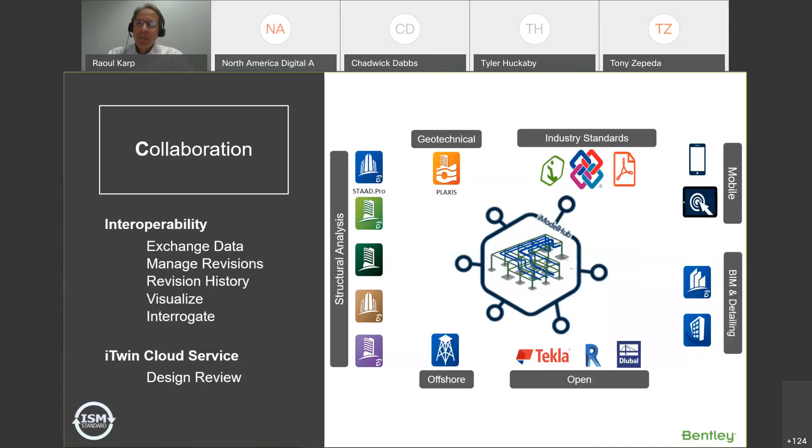I think whether you're a structural engineer working with an architect on a project, or a structural engineer working with, say, a pipe stress engineer on a project, as we see in this case, the iTwin Design Review Cloud Service is going to allow you to instantly share your design model with any other stakeholders in the project and conduct a real-time discussion through the web.

So from STAAD, you will soon be able to, for example, initiate a sharing session here, combine the structural model with other disciplines like piping, and have a conversation in the cloud with the pipe stress engineer, the owner, or even other structural design partners. In this case, we're going to try and resolve a clash or have a discussion about an issue with a clash on piping and structure, for example.

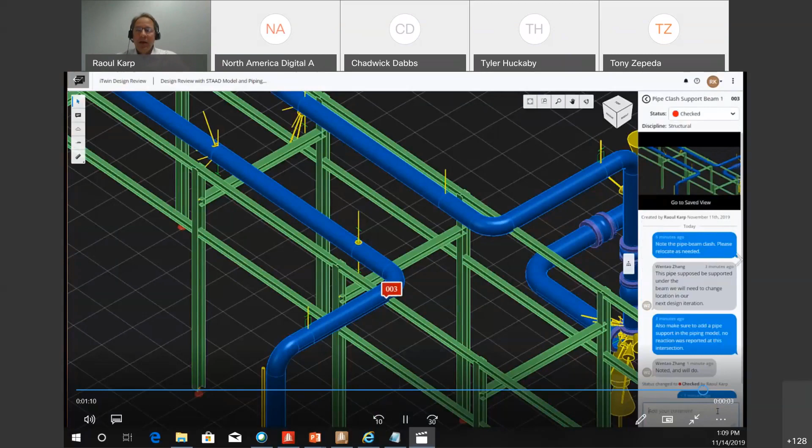The great thing about this technology is any stakeholder can access this with really just an email invitation. And the even better part of this technology is that they don't need to have any underlying skill set in the publishing product. So no STAAD knowledge is needed in order to utilize this capability. Great way to have an instant conversation in the context of your project, and that can be documented, tracked, and managed as action items through the rest of your project development.

I think another always hot topic for us is automation. Although when we talk to our users, they don't generally use that word. I think we hear more about how they want to be able to enter data once. You want to be able to share it between your products. And most importantly, you want to be able to automate as much as possible, I think, the repetitive workflow needs that you have.

For years, probably the biggest improvements in automation have been in the area of design code implementation and automation, and document automation. And really, we've made another major step forward in the STAAD Connect edition that you're going to hear about a little bit later.

But more and more, I'm also hearing that our users want to be able to do things beyond what the product can do. They want to be able to extract results, or even automate a workflow of their own, giving them perhaps a competitive advantage in a certain field. But to do either of these things requires a programming interface, and that's another area that we have invested heavily and continue to invest in. And this opens up some very interesting possibilities for you as our users.

So by exposing these interfaces, your company can, for example, now string together different products in an iterative workflow. We know, for example, that foundation displacement is a function of the soil stiffness. It's also a function of the foundation geometry and the reactions on that soil. And the reactions are, again, a function of the soil stiffness. So it's a highly interdependent design process using different products across different engineering domains.

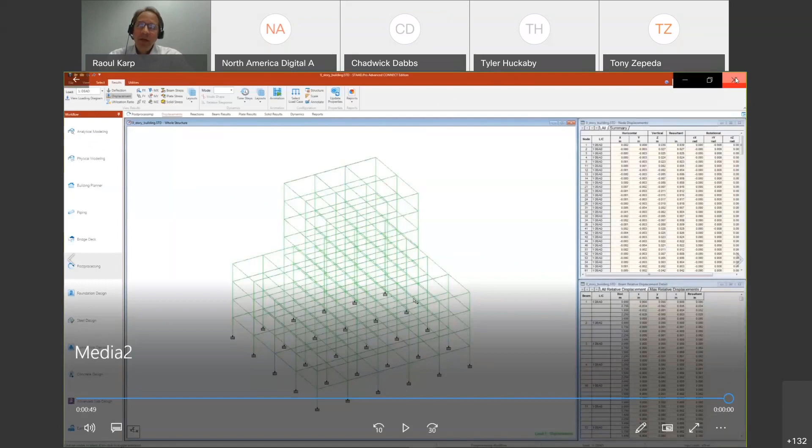So what if you were able to automatically iterate between, say, the structural analysis and the geotech analysis to produce a more accurate, efficient, combined analysis here together? So now, using the programmer's interface between these two products, we can couple and show an example here of using those programming interfaces to couple PLAXIS, our new geotech acquisition, with STAAD to automate that process. And you can use it for any of the workflows that you would like to within your organization.

So knowledge, technology, engineering requirements, they continue to grow, they continue to change. I frankly don't know how you stay on top of the industry and what you need to know, and even have confidence in the source of the information that you're relying on. We know YouTube is one of the largest search engines in the world, great source of information.

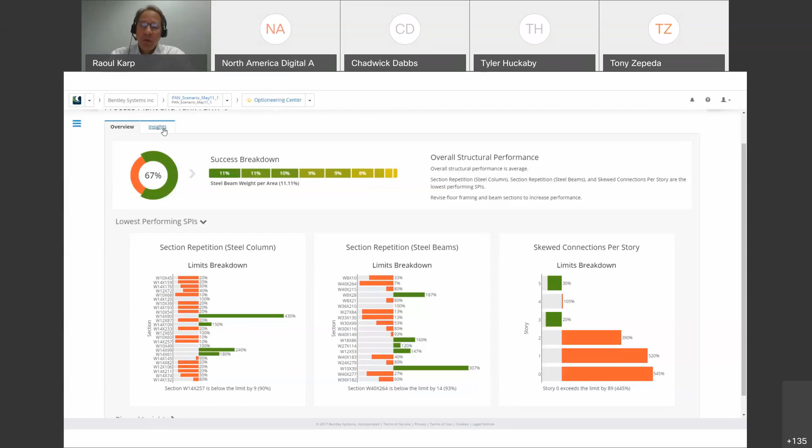With this new service, the cloud validation service, you're going to be able to do all of that. You're going to be able to establish a list of rules of your own, as we see here. You can then automate validation of these custom rules against the model. So the interactive web visualization you see here gives you clear feedback where you have met or failed or exceeded your internal QA criteria. This is a really powerful, easy to use and effective way to automate a large part of your quality assurance, even if it just highlights and identifies areas where you need to focus on for closer review.

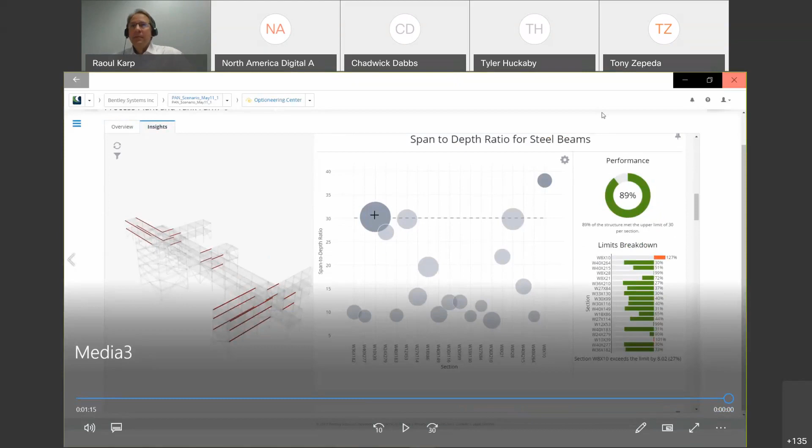So I mentioned at the start, STAAD Connect Edition. It's in large part a response to all of these areas and your feedback, areas that we could do better. I think you will see how, for example, the physical model approach allows much improved interoperability, including now with surface members, faster analysis for bigger projects, and concrete design and drawing automation has been taken really to a whole new level with this Connect Edition. And coming soon, the integration with the iTwin services I just showed you is going to be able to deliver many of the digital twin design review and validation capabilities that I just shared. This really is our most significant release in ages.

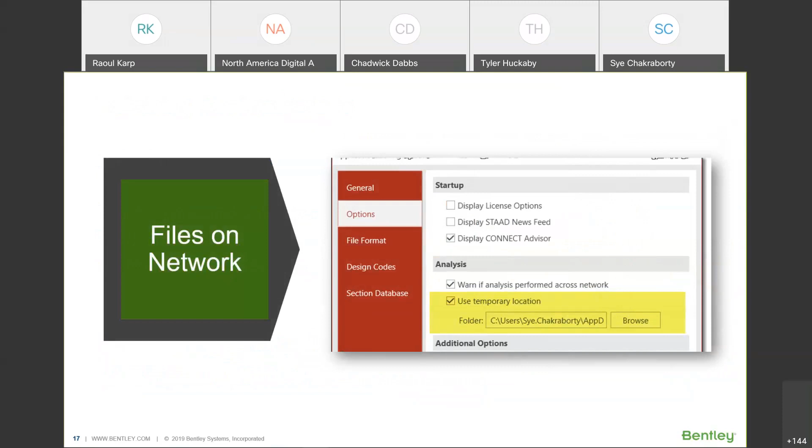I was talking about some improvements that we made for working with files on a network. So let me quickly show you. In a model, now what you can do is, if I just close the model for a second and go to the configure option from the startup page, you can go to options, and now you can set a temporary location in your local drive where STAAD.Pro can copy your model during the analysis. So this is certainly going to help with the performance of the software and will give you a faster analysis.

But having said that, I would still recommend that if possible, just keep the model on your local drive when you're working with STAAD.Pro. And once you are done, then you back it up on your network server. But if that's not possible for you, then the next best option would be to use this option. So designate a temporary folder in your local machine so that the model can be copied during the analysis.

Okay, so going back to our next slide, we actually introduced a new system of taking backups, and now you can actually create restore points. So say, for example, you are making major changes to your model and you would like to keep copies of those. Earlier, you had to just save the STAAD model by different names.

So there used to be multiple STAAD.Pro files for the same project, but you don't need to do that anymore. You can just create restore points and add adequate descriptions to these restore point backups. To do that, let me just open that same file, and you go to File, and then here is the Backup and Restore option.

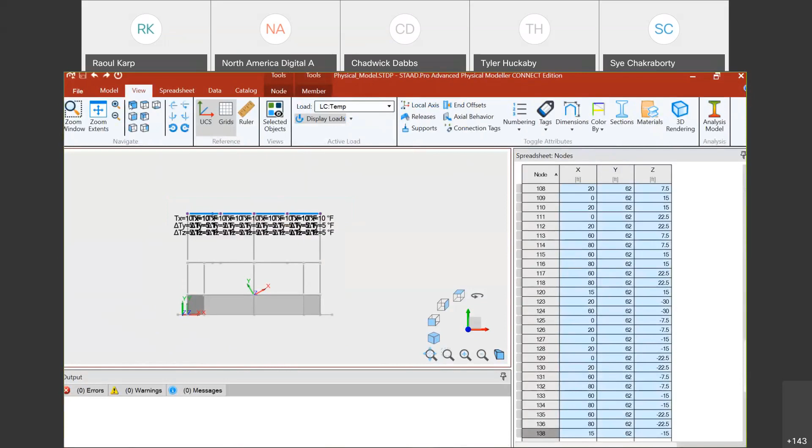And if I just go here, I have already defined a couple of loads for you. If I select a temperature load, let me view the model from the front and select these beams at the top. So you will see that I have applied temperature load to all of these members. Whenever a member is selected, if you go to the member ribbon menu option, it will give you the options which are relevant for the members.

And then you will see the temperature load in here, where you can specify the delta T basically for axial elongation or for difference in temperature between the top and the bottom of the beam or between the sides of the beam.

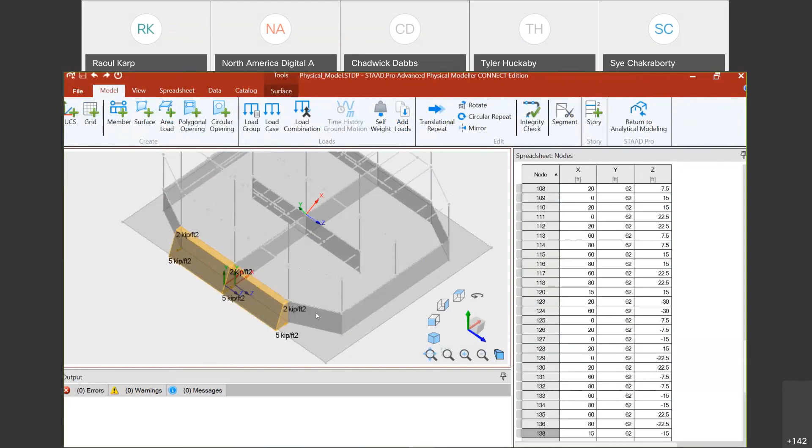Similarly, there are a number of options that have been added for the surfaces. So if I just select a surface, if I go here, you will see an option to add a variable pressure. So at various points on the surface, you can specify a value of pressure. That is possible. If you want to see how it looks, I have created a variable pressure load in here. So you see that there is a trapezoidal pressure distribution that I have created using this feature.

Similarly, you can add a hydrostatic load. So there's a trapezoidal hydrostatic load that has been added to the inside of the wall. And for hydrostatic load, all you have to do is basically just select a surface, go here, and just use this option, hydrostatic. And then you'd be able to define the density of the fluid that is retained and the level at which the pressure is zero. So basically, that's how you specify the hydrostatic load.

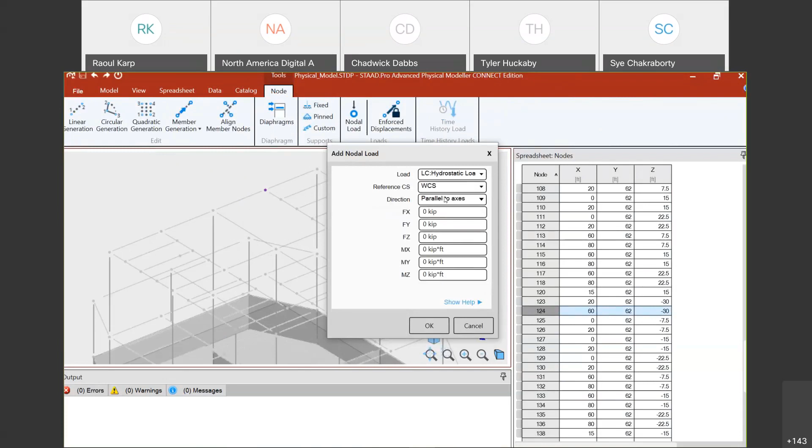And then let's say, for example, you want to define some inclined loads at the various nodes. So all you need to do is just select the node. And then if you go here, node, there's an option called nodal load. And that would allow you to define an inclined load parallel to any axis. So basically, you define a local axis, which can be at any inclination to the global axis, and then your loads can be defined with respect to that.

So if I just choose that inclined nodal load option, you will see that a number of loads in inclined directions have been applied. And this is with respect to this local axis. As you can see, it's inclined to the global axis system. And if you are trying to define repeat loads, all you have to do is go to File, Options, and then within the analysis model, you're going to see the option to generate the repeat primary load cases. So these are new loading options that have been introduced in the physical modeler.

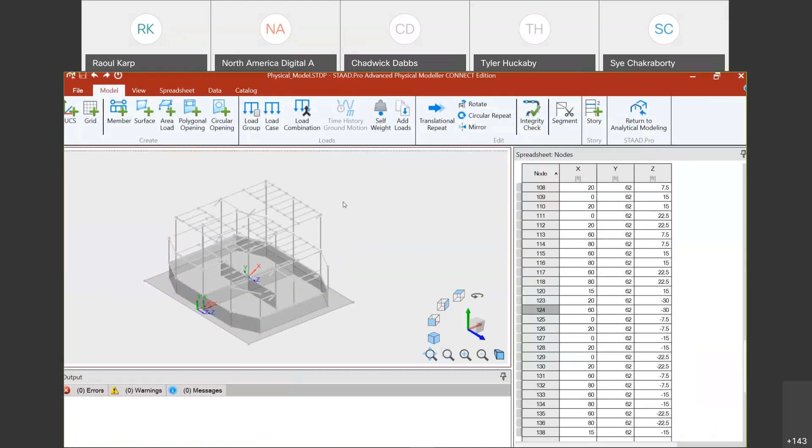Going back to the next slide, this is the new edit surface mode. So basically, you can select a surface and do some edits locally. So for example, if I just go back to my model, now before I make any edit to the surface, let me show you how the physical model is converted to the analytical model. So for that, you would have to just choose Return to Analytical Modeling option on the right-hand side. So at this point of time, the software is going to break up all your physical members or physical entities into analytical segments and get the model ready for the analysis. So once it's completed, you can click OK, and it's going to give you your finite element model.

As you can see, all of these entities are now meshed properly. There is proper connectivity maintained between the bottom slab and the walls, although we just defined the bottom slab and the walls as just one surface in the physical modeler. Similarly, these beams, which were just specified as single members, have been broken up into segments so that connectivity is established.

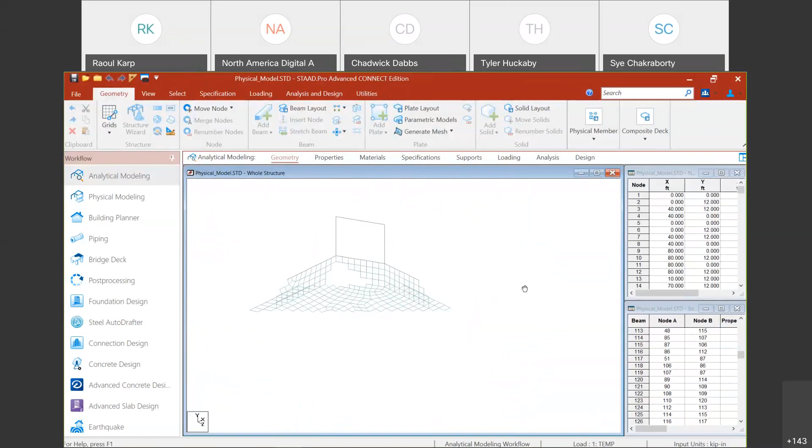So let's say I want to create an opening on one of these walls. I just wanted to show you how easy it is to use the physical modeler for these sort of purposes. So I'll go back to the physical model, and let's say I'll select this surface. And if I go to surface, there's an option called edit surface. So from this model, that particular surface is going to be isolated, and I'll be able to work locally on that particular surface. And let's say I want to add an opening to it.

So I'll go to circular opening, I'll specify the radius, and then click on OK. And there's a grid already that's created, and you can control the settings for the grid. And you just come in and select the center of that circle, and it creates the opening for you. And then it's not part of your main model as yet, but you can go back to the edit surface, and at that point of time, it will ask you, do you want to commit this change and make it a part of the model? If I choose yes, then it will basically create that opening in here.

And if I then go back to the analytical model, it's asking, do you want to save the change? I'm choosing yes. So basically, it's going to bring the change to the analytical model, and it would readjust the mesh. But if you want to do the same thing using the analytical modeler, you'd need to actually get rid of the mesh for that particular wall, and then recreate that wall with the opening.

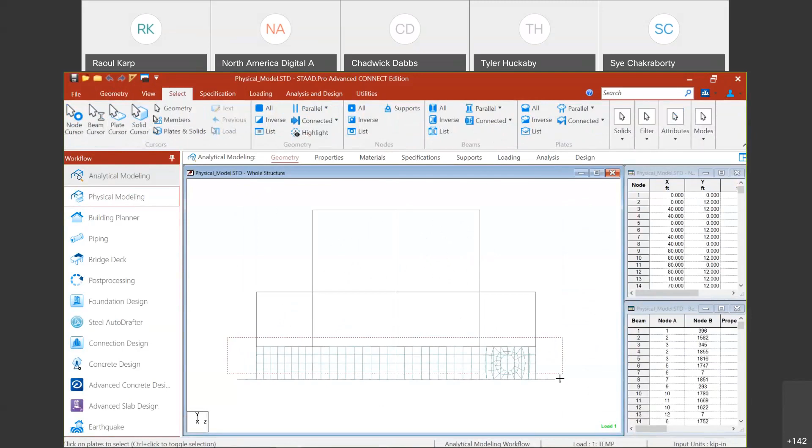So if I just view it from the front, and let's say I select the plates which are for the wall, and go back to this view. Now you can see how that opening has been created in that. So these are the kind of flexibilities that the physical modeler allows you.

And as I said, it's something that is under development. We are working on it, and so with every version, we are adding new capabilities. But if you are someone who enjoys modeling with physical entities, this is the right time to get your feet wet and start experimenting with it.

We added the IBC 2018 ASCE 7-16 code, so you'll be able to add this code. It will be available as a selection for you. And when I go into the steel design portion, I'll discuss this one too.

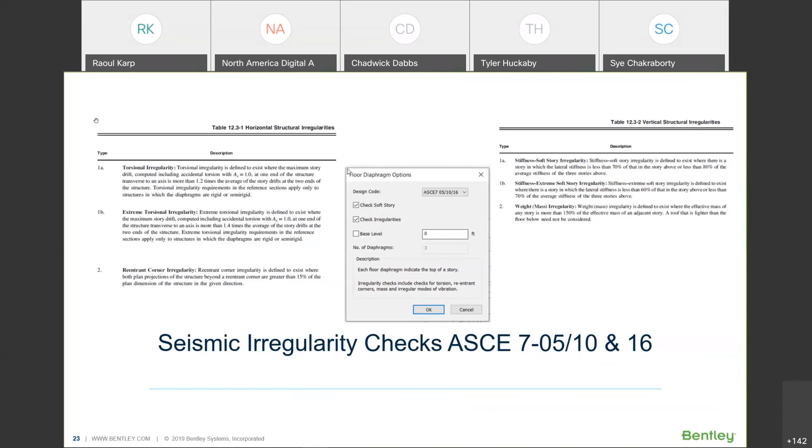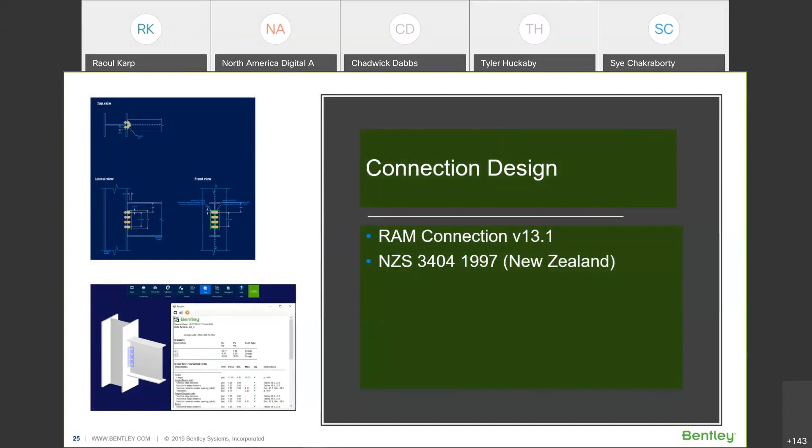We introduced the connection design using the RAM Connection version 13.1. I'll do a little presentation on that down the line. And the highlight of that one is the addition of the New Zealand code to the RAM Connection interface.

Viewing multiple sets of design results for the AISC 360-16 code, this is something which as a user, I'm pretty sure you'll be all excited about. Let me just show it to you. So I go back to the analytical model, go back to the steel model, and if you go to the post-processing, then here you will see the various parameters. So each of these represent a particular code check done with a certain set of input parameters. And now you'll be able to see all of these using the graphic user interface.

So if I turn off the displacement and turn on the utilization ratios, so this is for parameter 1. If I change to parameter 2, it will just update my view to parameter 2. And similarly, you can get those shown in your design tables as well.

We actually revamped the results along cut line feature. So now you're going to have stress continuities across element boundaries, and equilibrium of forces will also be maintained along the line. So the results that you are going to get using this feature now are going to be much better than what they used to be.

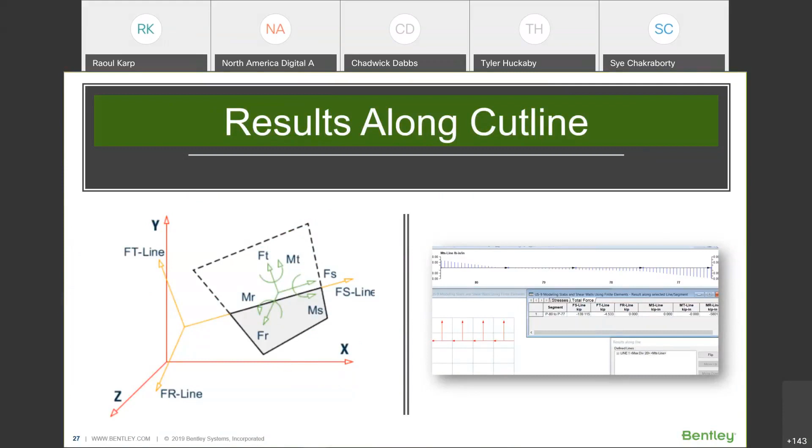The advanced concrete design, we have a detailed presentation on that later on, using which you'll be able to generate detailed drawings and bill of materials, etc., straight off your STAAD.Pro model.

We made significant changes to the analysis engine, so you are definitely going to experience a lot better performance from STAAD.Pro. Even if you are using a STAAD.Pro standard license, V8i versus Connect Edition, you would see a 1.5 times improvement in performance. So a standard license used in V8i, when compared to a standard STAAD.Pro license in the Connect Edition, the Connect Edition one is like 1.5 times faster.

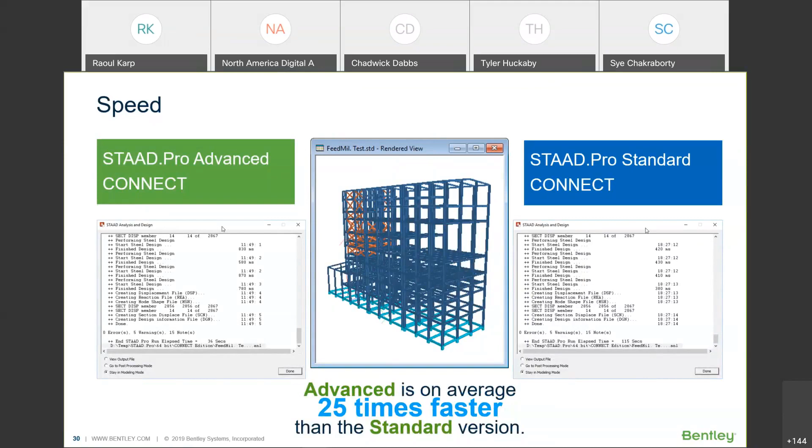Of course, it varies from model to model, but the difference is more significant when you have more complex models that take a long time to run. These are models where you are really going to see the performance improvements. And then again, even in the Connect Edition, if you are using the standard versus the advanced license, advanced is a lot faster.

And Raoul talked about the interoperability at the beginning of the presentation. I've also included this specifically to highlight a few of those. We have got direct integration with STAAD Foundation Advanced, using which you can do the foundation design straight off your STAAD.Pro model. I'm going to show you that. The RAM Connection integration, again, I'm going to show that to you, how you can quickly generate connections, connection calculations and drawings from your STAAD.Pro model.

Then we have the advanced concrete design, or the RCDC. That's going to allow you to generate drawings and bill of materials from within STAAD.Pro. And last but not least, the AutoPIPE integration. So you'll be able to bring in any piping loads into your structural model, and then send the combined piping and structural model back to AutoPIPE for further analysis.

And apart from the direct integration, we also have the ISM-enabled integration. So any package that is ISM-enabled would be able to communicate with STAAD.Pro, be it a Bentley software or a third-party software. So all of our RAM suite products, and then ProStructures, and all of the Bentley products which are ISM-enabled can now talk to STAAD.Pro. And also third-party products like Tekla or Revit, you can also get data from those packages.

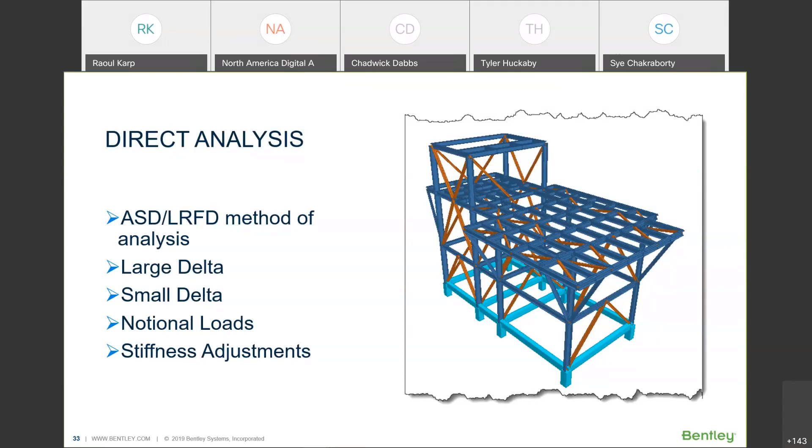Let me bring up the STAAD.Pro model back. And actually, let me just show you a 3D rendered view of the structure. I haven't really spoken about the structure as yet. So it's a typical industrial structure, as you can make out. It has got multiple levels and braces in the vertical as well as horizontal planes. And I've got a few projections on the sides. The platforms have little projections. These are supported by knee braces.

And at the bottom, I've included a few concrete members. So at the grade level, you see a few concrete beams supported on a few concrete columns. So we are actually going to do an analysis of this structure. I've specified all of these specifications that you'll be able to check out later when you get the model. All of the braces have been specified as trusses, and I've specified a number of releases at the various beams.

And then for the loading, what I have done is I've included the IBC 2018 seismic load generation. This is something that has been added in this version, IBC 2018 ASCE 7-16. All the parameters have been specified relevant to the code, and some seismic weight has been added as part of the seismic definition.

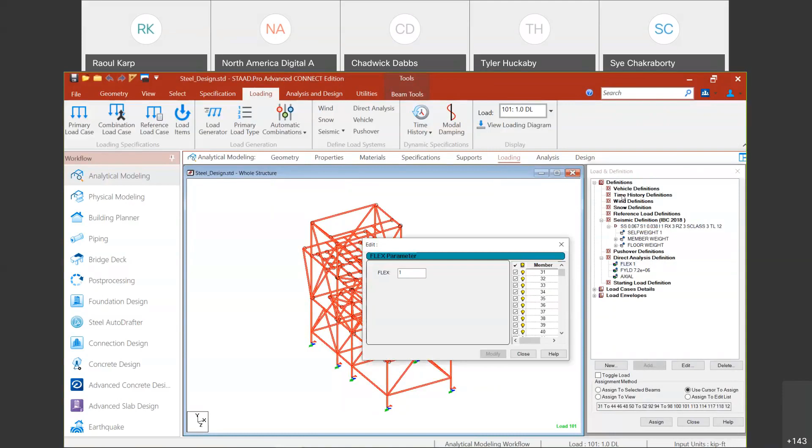Then I've done the direct analysis definition, where I've specified the FLEX parameter. So FLEX is basically, if you remember, the code asks you to make modifications to your flexural stiffness, and there is a tau b term in that flexural reduction. So what you are specifying here is the initial value of tau b for the first iteration. So that is specified as 1. So basically, it's like 0.8 times tau b times E times I. For the next iteration, the software is going to figure out the axial forces in the members, and it's going to calculate the value of tau.

Now, initially, when the direct analysis came out, we were supposed to assign these flexural stiffness reductions to only the members whose flexural stiffness would contribute towards the lateral stiffness of the structure. But the code also mentioned in the later versions that it's better to assign it to the entire model so that you have a uniform stiffness distribution. Because if you assign it selectively, there's a chance that you're going to jack up or jack down the stiffness at different locations, which may interfere with your force distribution. So that's the reason I've just assigned it to every member.

FYLD again is the yield stress used for the calculation of the tau b. And then you have the AXIAL parameter. This is for the axial stiffness reduction. That also has been assigned to the entire model. So there are 2 parts to specifying the direct analysis. You do the definition in here, and then you include the analysis command. Now, if I go to the load cases, I have added the seismic load in X direction and seismic load in Z direction from the IBC 2018.

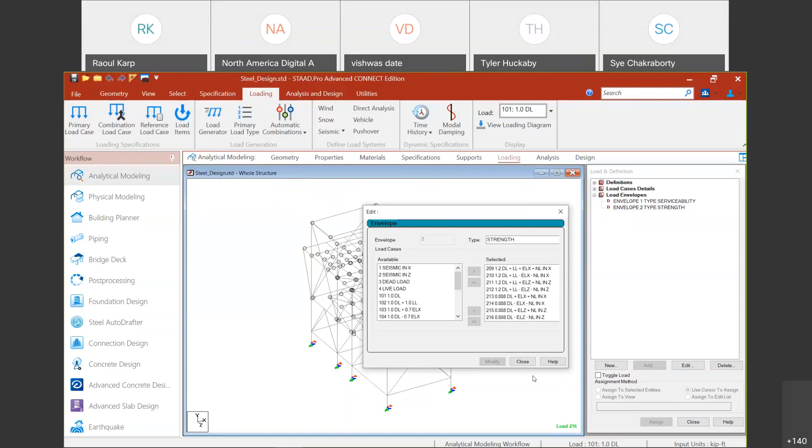So the reason we do that is when you ask the software to do a steel design as per the AISC 360 code, it will automatically do serviceability checks on those load cases which are part of the serviceability envelope, and it would do the strength checks for those cases which are part of the strength envelope. So that's automatically done. But it's important that you have these envelopes defined.

And one more thing you have to do before you start putting in your design command, there is a load list command that you need to include. There's a LOAD LIST ENV. ENV is the abbreviation for envelope, followed by the envelope numbers 1 and 2. This is something that you should always include before doing the code check. Now, unfortunately, there is no option in the GUI as of now. So for now, I would suggest that you just use the editor for this one, but we are going to add this in the GUI down the line.

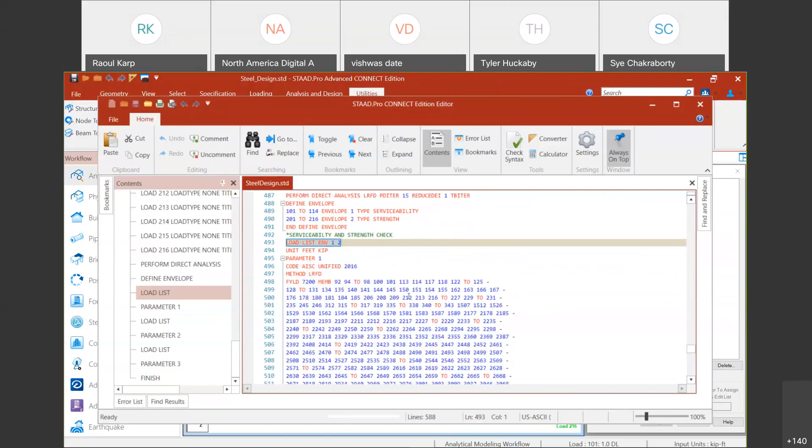So once that is done, then you go and specify your code check. So as far as steel design is concerned, these are the various checks that are carried out. So it starts with a slenderness check.

If it's a member subjected to compression, it checks against an allowable upper limit of 200. If it's a member subjected to tension, we check it against an upper limit of 300. Then the software checks for axial tension, axial compression, shear, flexure, torsion, and also interaction of flexure, tension, compression, shear, and torsion, if appropriate. And then it does a deflection check also. So we're going to take a look at these checks.

One thing that I wanted to highlight is in the AISC 360-16 implementation, there is one thing that is different in our implementation in STAAD.Pro, which is the sign convention that is used for reporting. So if you remember, in STAAD.Pro, x-axis is the longitudinal axis, whereas z-axis is considered as a major axis, and y-axis is the minor axis.

But as per AISC convention, x-axis is considered as a major axis, and z-axis is basically the longitudinal axis. So while reporting the AISC 360-16 design, we are reporting it in terms of the AISC specifications. That is one deviation from what we have done in the past. And this is actually explained pretty well in our analysis output file. Let's go and take a look at it.

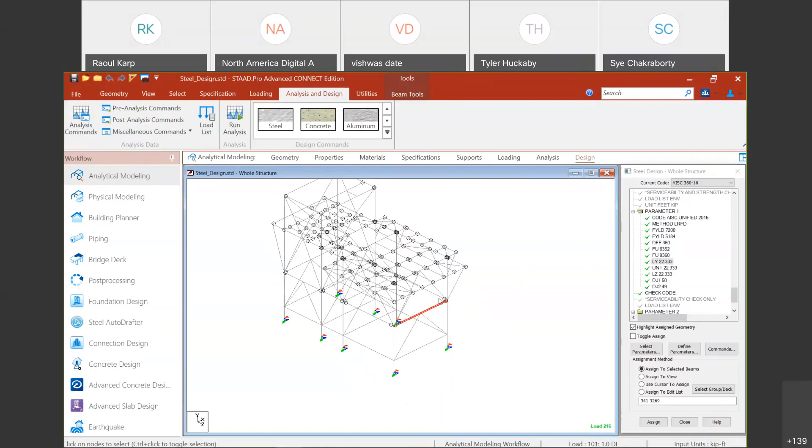And then there are a couple of other important parameters, like say LY. Now this is used for specifying the unsupported length of the member. So for example, in this case, if I just highlight this, and if I show you a 3D rendered view of this connection, you have the wide flange, and then it is supported by the chevron brace underneath. So as far as the major axis bending of this member is concerned, you already have the braces modeled. So it is split at the center.

So you don't need to specifically go in and specify any unsupported length when it comes to bending about the major axis. Whereas if you consider the bending about the minor axis, the entire length of the physical member needs to be defined as unsupported. Now, unless you specifically go in and define that through the LY parameter, the software is just going to go with the default member length of the analytical segment. So just be mindful of these things.

So that's the reason I have specified LY as 22.33 feet, which is the entire distance from this column to this column. Whereas I have not specified any LZ, because by default it will be taken as the length of the analytical segment, which is fine. Similarly, you would also have to specify the UNT and the UNB, which are for the laterally unbraced length of your compression flanges. These are used for your lateral torsional buckling checks. UNT stands for the top flange, and UNB the unsupported length for the bottom flange.

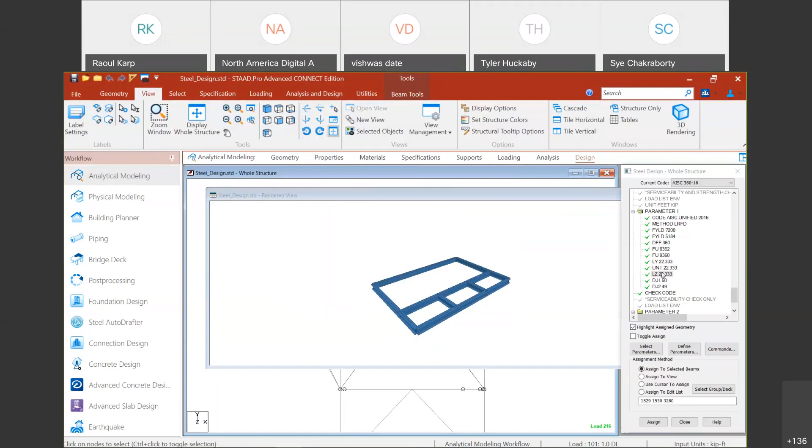So in this case, you don't need to specify any LY, but you need to specify LZ, which is for the major axis bending. So that's the reason I've done here. Similarly, for the deflection check for this member,

if I turn on the node numbers for a second, let me turn the view a little so that you can see it, and let me turn the node numbers on. So if you see node number 50 and node number 49, these are the two end nodes as far as this entire member is concerned. So that's the reason I specified DJ1 and DJ2 as 50 and 49 respectively, so that when it calculates the deflection, it considers this entire length between DJ1 and DJ2 as the unsupported length of the member.

So just be careful about specifying the design parameters. Simply selecting the design code and choosing the design command doesn't really give you a correct design under all scenarios. So just be mindful of that. Once you specify the design parameters, then I have used the check code command, which basically checks the sections that you have selected, and it tells you whether it's appropriate for your loading conditions or not.

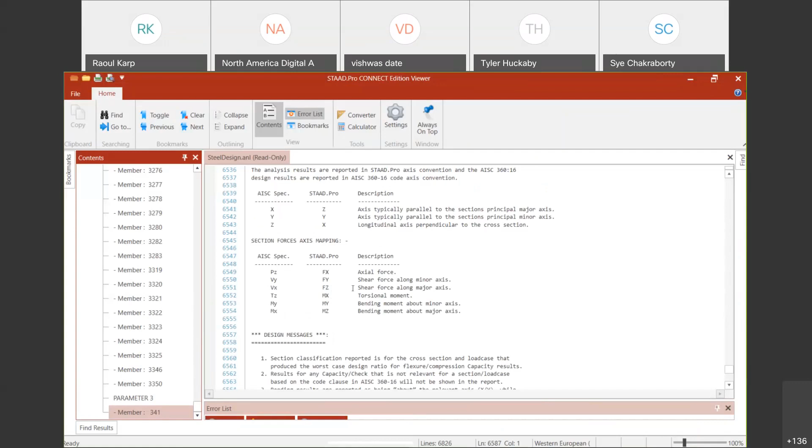And at this point, I'm just going to go into an analysis output file, and I'll walk you through the output of the AISC 360-16, since it's a bit different from what we have done in the past. So I have just selected a member here, and here is where it actually details the sign convention that I was talking about. The AISC 360-16 conventions are clearly laid out here, along with the STAAD sign convention, so that you are aware of it. And then it goes into the detail of the design.

So first of all, it tells you that the code is the AISC 360-16 LRFD, and then the member number, what profile it is, so wide flange, which database it is coming from, then whether it's a pass or a fail. Then it gives you the ratio, the most critical ratio out of all of the limit states that it's checking for strength, and also out of the serviceability. This is the load case which is the most critical. Then it gives you the location from the start of the member. So at 11.16 feet from the start of the member, you have this critical section for design.

Then it also gives you the clause number from the code which is critical. And then these are the forces in the critical section. And then it checks for slenderness. Since the member is in compression, as indicated by the C out here, it checks for slenderness against an upper limit of 200, and the member slenderness is 176. So we are good out here. Then it moves on to the strength checks.

For serviceability and strength, you get two different ratios. So this is the highest ratio in terms of serviceability. This is the highest one in terms of strength. The higher of the two basically governs your total design, so that's the one which is reported up here. And then it reports a few section properties, material properties, and then it does a section classification. It separately classifies the section for flexure and for compression, and it gives you classification for the web and the flanges. And so it uses the appropriate classification when it does the corresponding check.

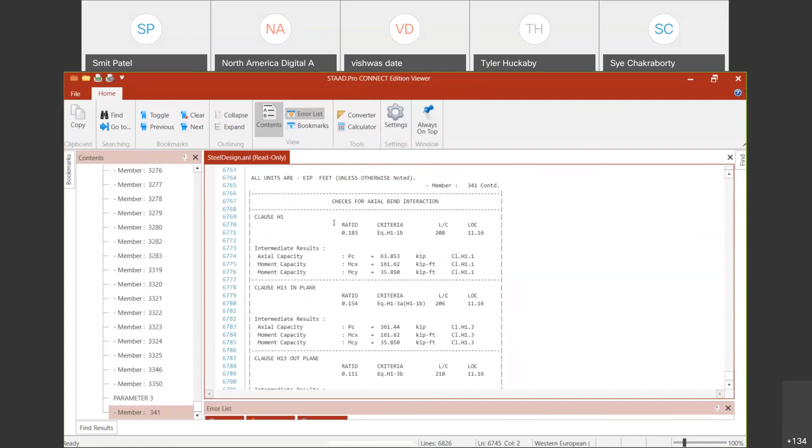And once all of these are individually checked, it goes for the interaction checks. And if you note, for all of these checks, it's reporting the critical ratio and the equation numbers that it uses from the code. And at the very end, there is some detail provided for the deflection checks as well. So this is the actual deflection followed by the allowable deflection. Since we included DFF as 360, it has divided L by 360, and that's how it arrived at the allowable value of deflection. So these are the various checks that the software carries out, and this was a check code.

But if you want to do a member selection, then the design commands are going to be different. So instead of check code, you're going to use this set of commands. I have listed this so that you can use this sequence of commands for the design. It starts with analysis, then you ask the software to do a member selection. Then there's a grouping that is required. The grouping is necessary because the software is going to select the individual best fit section for each segment.

But to get a more practicable design, you would like to have the same cross-section for your entire physical member. So that's what you achieve through the group definitions. Then you follow it up with another perform analysis. Since you are doing a member selection, the stiffness of the structure is changing. So you are analyzing the structure once again so that your member forces are the latest, and then check your member sizes.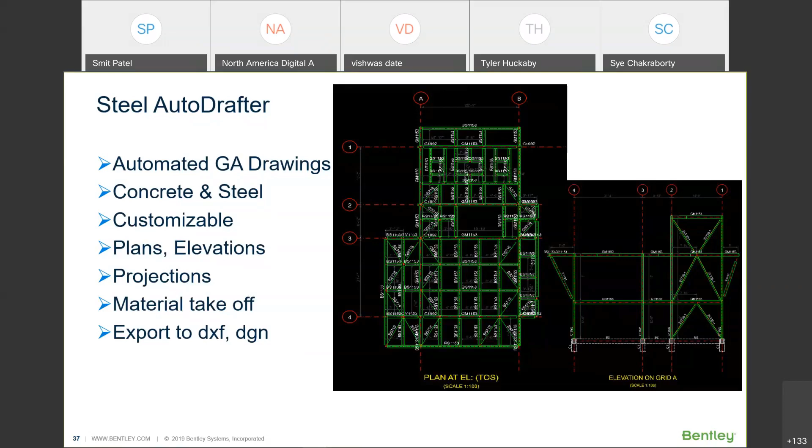You can generate plans and elevations. If your model has projections, then you can generate plans on these projections as well. You can do a material takeoff and export your drawings to DXF and also to DGN and open them in MicroStation. So I'm just going to go back to the model for a second, turn the node numbers off, and then go to the Steel Auto Drafter.

So this is the Steel Auto Drafter interface. The first thing you may notice, there's a little cube out here, and this little cube allows you to change your view to some preset views pretty easily. For example, if I want to view the structure from the left, I can just click on the left face of the cube. And if I want to view the structure from the front, I can click on the front. And if you click on the corner, it goes back to the isometric.

If I click on the top, it gives me a plan view. So pretty cool that you can do it this way. And also there's a home view where you can just get the isometric. And then of course you can rotate the structure as needed as well.

The first thing that you do after coming into the Steel Auto Drafter is set up your grids. Depending on your column location, the software is going to create some grids for you. For example, A and B grids are already created in the X direction, but these are completely customizable. You can have your own grid name. It could be alphanumeric, and you could include any symbols as part of it.

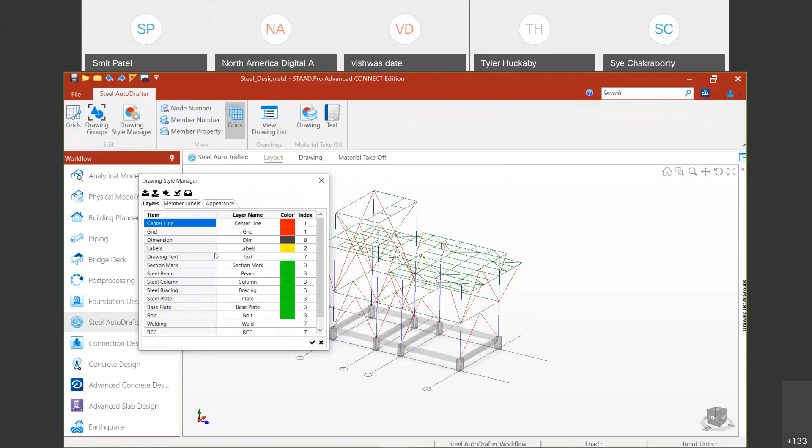Once you set up your grids, next you can customize how the drawings are going to be shown. You can set your colors for each of these individual entities, and for the member labels, you can put in your own company standards. Whichever way you want to name your columns, it could start with a C, it could be something else. Girders with moment connection could be GM, girders with shear connection could be GS, like that. These are completely customizable inputs depending on your company standards.

You can just set it up. You can set up the appearance of the various entities, like the text height and how the dimension lines are going to be colored. So let's say I want to color the dimension lines in yellow, and the extension line, maybe I can also choose yellow. So whatever you want to do, you can do it from here. My drawing unit is set to English. It could be metric as well if you need.

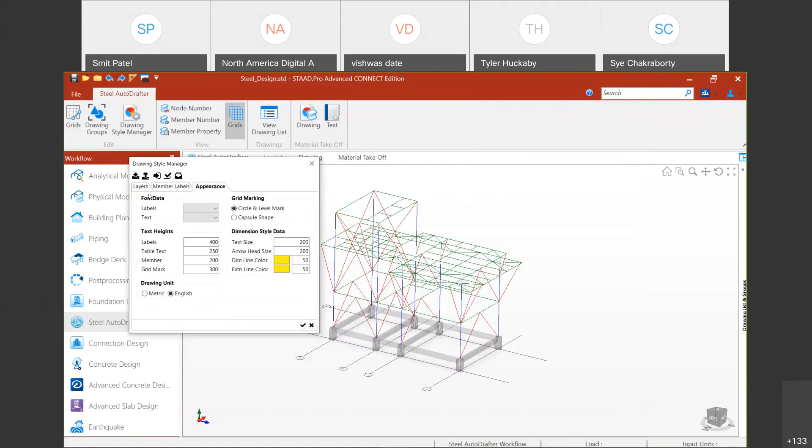And the beauty is you can actually save this setting as an ADS file. So basically, I can come here and I can export the style setting, and it would just save it as a file, as an ADS file, and I can just give it to any other colleague of mine, so that he can import this file into his Steel Auto Drafter, and that way you would not have to set this again. So once it's set for my company, I can just use it straight out of the box.

So let's generate a couple of drawings here. So what I'm going to do is select the concrete beam at the bottom, and I'm going to draw a plan out here. You can set your own scale, and then you can choose whether you want the full sections or partial sections. And if you click on generate, it's going to generate a drawing. So as you can see, it's a CAD style drawing. So you have all your grids marked up, all your beam members marked up, column members marked up, and it also gives a description of those.

Let's generate a drawing for a steel level. So I'm just going to draw a plan out here. Again, I'll just choose the same settings. So you have the drawing for the steel members. And if I just zoom in a little, there is a little intelligence that is built into these kind of drawings, because if you note, GS is what I have designated as the beams which have the shear connections at their ends. So you will notice that there is a little gap that the software has left at the end where it connects to the other members. So these are for the shear connections.

And it reads this information based on the releases that I have provided in my analysis model, trying to indicate that it's a shear connection here. Whereas for this member, this girder, which has moment connections at its end, you'll see there is no gap. It straight away connects to the flange of the column. So these are little things that are in there. So all of the beam markings are there.

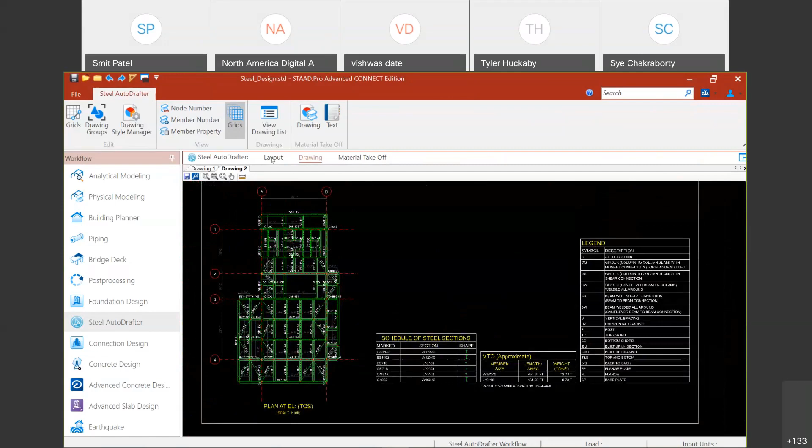And similarly, there's a schedule that is published with all the markings, all the section designations, all the cross-section types. And you also get a material takeoff for that particular level at which you are generating the drawing. So you can generate drawings like this. And it's not that you have to generate drawings one by one. You can just go to your drawing list. And there you can just choose your plan, and I'm going to generate, let's say, for all of the grids. So I just include it as part of the list.

And once you do the drawing generation, then you'll be able to see the drawings for all of the levels at the same time. So here my grids are all not set up. So that's the reason why I'm not able to generate the drawing for all of the levels at the same time. But let's try with the section and see what happens. So I'm going to add this.

So it generated two sections along the X direction, and let's try a section for Z also. So as you can see, it generates a number of sections or a number of drawings automatically, and then all I need to do is just click on this automated generation, and it's going to generate the drawings for the various levels. But just ensure that you are setting up your grids prior to doing the drawing generation. Otherwise, it would not be able to find any grid numbers, and that's when the software would tell you that no grids are available, the message that we were getting earlier.

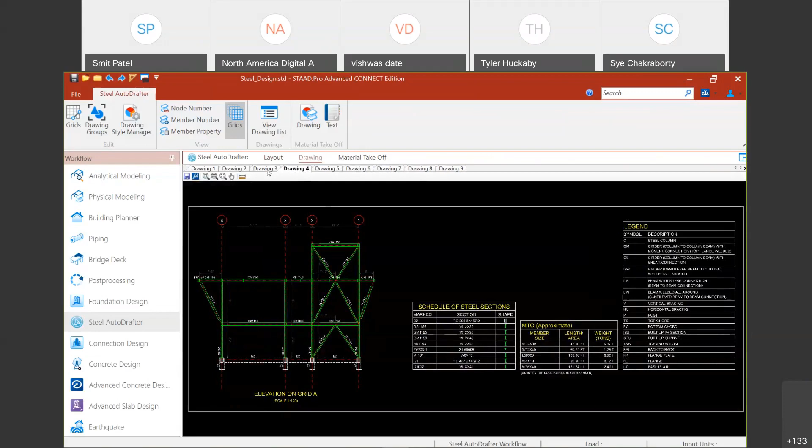So this is how you can just generate the drawings for the various levels of your structure. And not only that, you can generate your material takeoff, and you can do it in a CAD style like this, where you're going to get each section type along with the length or area. If it's a plate, it would report the total weight in tons. So this is a CAD style reporting, or if you want a text style reporting, you can also get that. So this can be exported as an XML file and sent to your customers. So that's about the drawing generation.

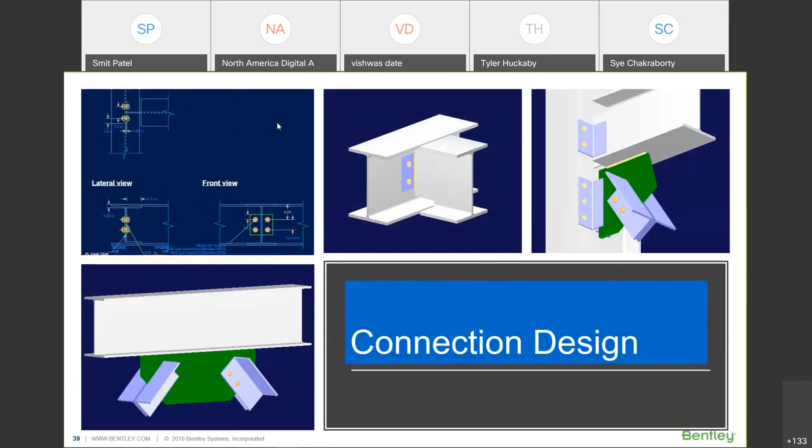And I'm going to just go into steel connections and show you a couple of steel connections, just to show how easily you can just generate these connections out of your STAAD.Pro model using the RAM Connection version 13.1 interface. So go back to this model, go to the analytical modeling. So the structure has to be analyzed first, and then you can just simply go to the connection design, and you can just choose any of these connections from here.

Let's choose, say, a chevron brace connection, and I'm going to choose a gusset connection for this. You choose which design code you want to design with. So AISC 360-16 LRFD, and then this is a chevron brace connection. I'm going to use both the templates, and ask the software to do a design, and it will do a design and give you a connection design up here. So first of all, it would show up as a row in the table on the right.

So the green light basically means that the connection is passed with the ratio of 0.39, and you can double click on that and it will bring up the connection pad for you. So here you can see that it has actually designed a gusset connection with the braces, and you have the individual control over all of these entities. So in the connection pad, you can go and you can just choose, say, the lower right brace,

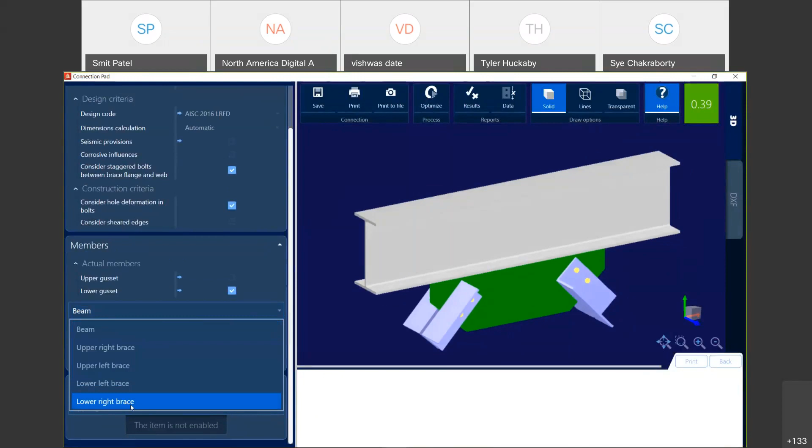and so that is this brace. And for example, the orientation of this brace doesn't look the right way. So what I can always do is I can choose this option, the orientation, correctly for this one. And these are the individual controls that you have over each of these members. Say in this interface, if for the lower right brace, I want to change the number of bolts, I can absolutely do that. And the connection design also would be updated based on that. So right now I have a ratio of 0.39 based on all of the load cases that it has designed the connection against.

But let's say if we change it to 3 bolts for this member, and also for the lower left brace, let me also change the number of bolts to 3. And when I do that, my utilization ratio comes down to 0.26. So you can modify your connections dynamically, and then you can save it. And all of these customizations are basically going to be retained in your STAAD.Pro model.

So later on, if your STAAD.Pro model is reanalyzed, your forces are going to change, and then the software is going to just check the same connection with these 3 bolts, but based on the new forces, and then it's going to tell you whether it's a pass or a fail. Or you can also ask it to optimize the connection, at which point it would check based on the new forces whether it requires the 3 bolts or not. And it's not that you have to do these connections individually. You can actually just select all of the connections of similar type, and then have RAM Connection design those. But before I show that to you, let me show you another type of connection.

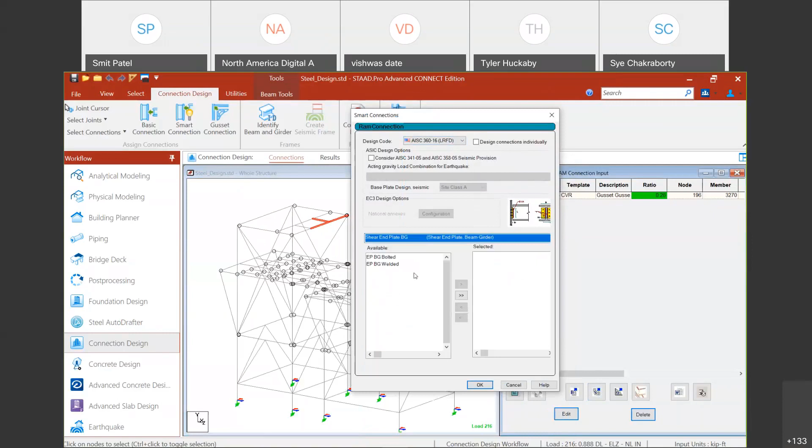Let's say connection between a beam and a girder, and we are going to use, let's say, the smart connection, and I'm going to choose the AISC 360-16 LRFD, and this will be a shear end plate beam girder connection. I'm going to choose the templates and ask for a design. And so if you look at the design of any of these, you will see that the beam has automatically been coped. Since the girder and the beam in this case were of the same depth, it has automatically created the cope in one of the members.

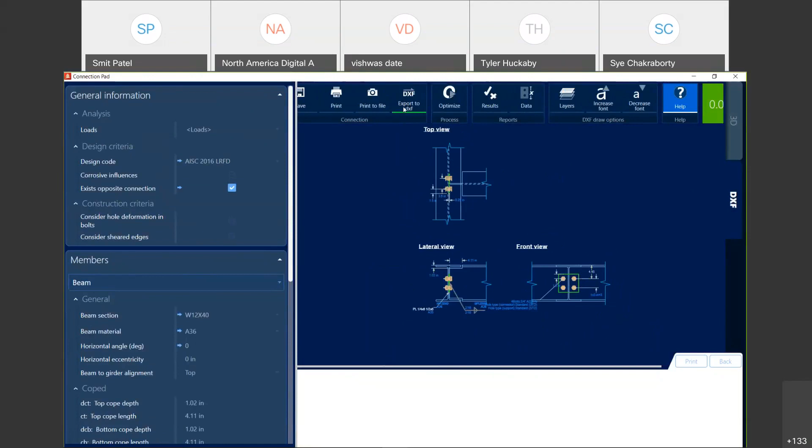And then also, instead of the 3D model, you can generate the DXF drawing for the connection as well, which can be exported as a DXF file, as you can see here. You can look at the results, which would give you the details of these calculations. So there'll be all of those geometry checks, then the design checks, and you have the clause numbers, the specific table numbers, the equation numbers, and each check is documented here. It will give you the capacity and also the demand for each of these checks, and also tell you which of these load cases are critical for that particular clause, for that particular check.

And if you need more detailed calculation, there is a little icon in here. If you press that, it will give you the detailed formulas that it uses for these various calculations. So once you press that, it will just give you all the details. So if you're trying to do any kind of hand check on your connection design, that's the way to do it.

Okay. So next, before I jump into the foundation design, I'll hand over this presentation to my colleague Vishwas, who's going to walk you through the advanced concrete design that we talked about. Vishwas. So Sye has given a very good presentation on STAAD and steel structures. I'll cover the concrete part.

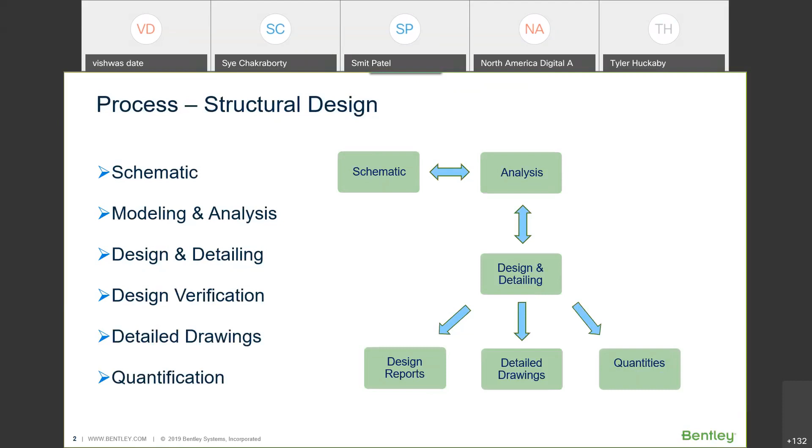Then you provide details to site, and of course the quantities for execution as well as procurement. What we have is a software called STAAD Advanced Concrete Design, which actually handles all of this together post analysis. So let's see what kind of outputs are generated through this. What we believe is visualization is the most important tool in any software.

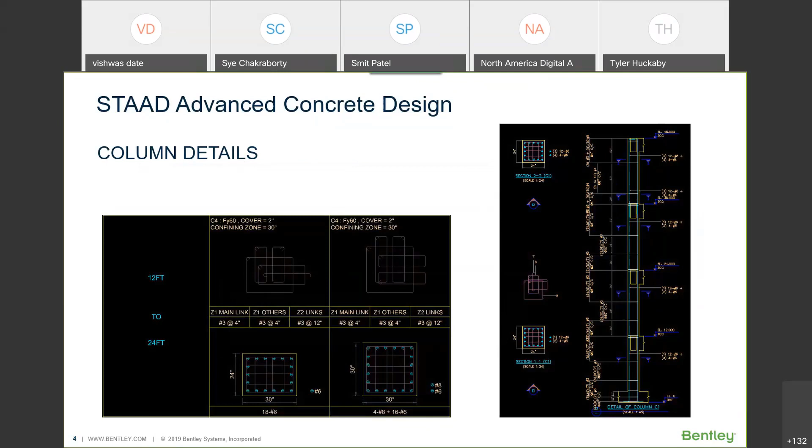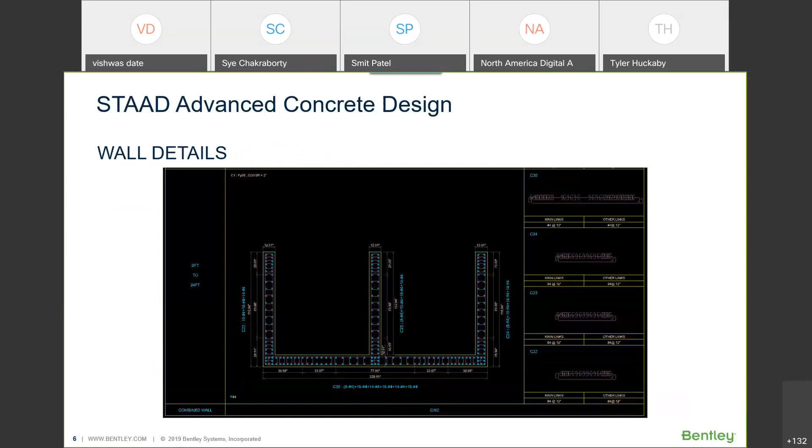We can handle irregular shapes of columns. If you happen to have some columns which are irregular shape due to whatever constraints, you can put them as SD sections instead. We'll read those and create reinforcement details for those columns. We also handle combined walls. Typically your lift cores tend to be C-shaped, E-shaped, those kind of things. Those walls are read together and analyzed and designed together. So we handle all of that.

Once you have completed the analysis, generally you will want to verify the results. You will look at some bending moment diagrams, some deflection shapes, and all of that. Once you are satisfied that your analysis has more or less achieved the status you want, you will go into column design. So you launch a product called STAAD Advanced Concrete Design Center. Once you are here, you fill in some details like project name, client, for your reference, and engineer's name.

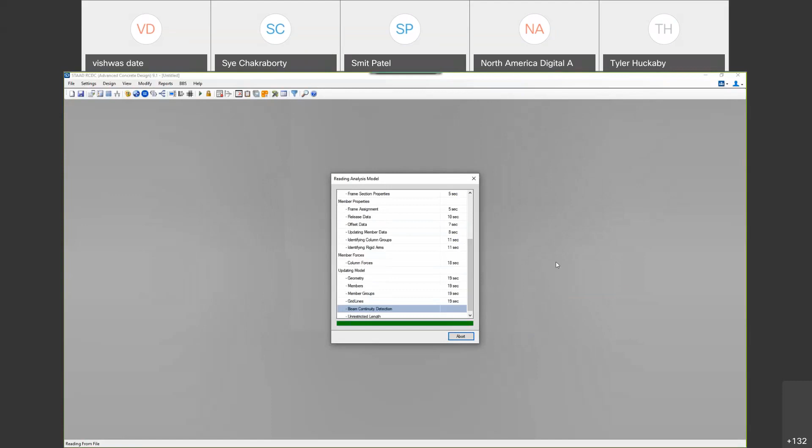Select the code you want. In this case, we'll select ACI 318-2014. The STAAD file is already listed here because you started from there. Then you choose the elements, for example columns and walls, and start the design project. Once you are on the screen, it reads the geometry completely. It reads the forces, the member sizes, and also things like connectivity releases between various beams. All of those are important because they allow you to make engineering decisions.

Once the data is read, the screen is divided in two parts. On the right hand side is a graphical part, on the left hand side is a tabular part. These screens are customizable. In the graphical part, you will notice that we have put grids and column numbers. Whereas in STAAD what you always have is members, here we have columns. Columns we track in elevation.

So from bottom to top, wherever the column goes, we track. And we identify column centers and put grids over there, including the grid dimensions, because our drawings are not complete without the grids. So this is where the intelligence in terms of what concrete design offers to you post-analysis starts.

What you will notice is that all the grids are identified, again as Sye showed you in Steel AutoDrafter. These grids are customizable. So if you want to turn off certain grids, you can do so. If you want to put certain additional grids, you can do so.

Also, you will notice that it will read the shear walls. STAAD has a parametric surface model for shear walls. STAAD Advanced Concrete Design Center reads those and converts them into combined walls. So for example, CW1 here actually consists of 4 different walls, 1 horizontal and 3 vertical. They form a combined E shape.

That's the reading part. The other part that you will notice is that we form something called column families. So for example, column C2 consists of 4 members at 4 different levels. We identify the column verticality, one on top of each other, and name them as C2. So unlike STAAD, where each member is a member with no specific physical meaning to it, we create that physical meaning because our drawing has to show the column numbers and not the member numbers.

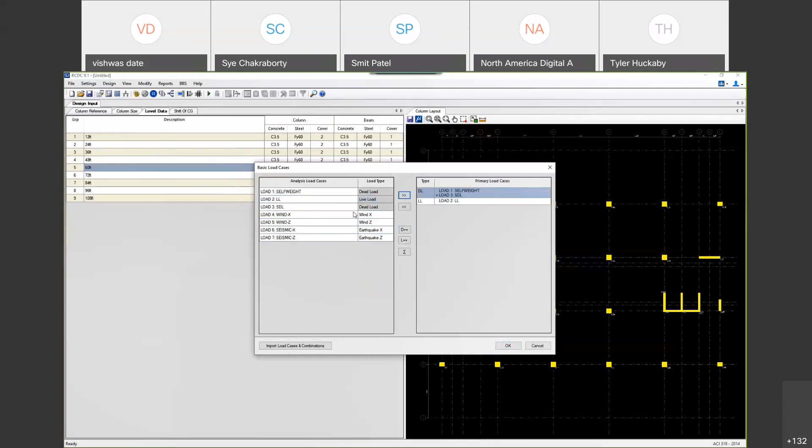Once you have selected the primary load cases, you have to get them into your design model. So you have to select the primary load cases. Here, 2 dead loads together constitute a single dead load. So we have combined them, and the other cases come directly.

Going to design combinations, there are various methods. So you could add from analysis. If you have specified the design combinations in the analysis, you simply add from analysis. If you have templates which are either created by you or based on code, or we have standard templates in our software, you could use them and import them. Once these settings are done, you are ready for design.

Once design is completed, what you will see is a column failure report. So in this case, between 0 to 12 feet, 4 columns have failed. Now, what do they mean by failure? Column failure can happen on multiple accounts. So there is a report called failure diagnostics.

If you go to that report, you will see that these 4 columns at these levels are mentioned with their individual member numbers from the analysis. And that failure is basically a detailing failure, which means that the given percentage of reinforcement and rebars don't fit my column.

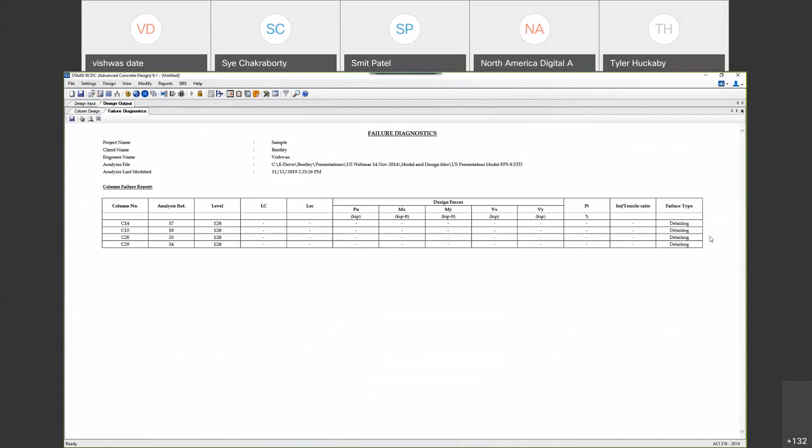Now going further, typically when you issue drawings to site, you don't provide individual columns with individual sections. You tend to group the columns in design. So in plan, you will see the 4 corner columns to be similar, the 4 central columns to be of similar design, similar size, and so on and so forth. So there is a way to do it.

So if you go to a report called snapshot, what it will do is it will list the columns of same size together, which go across multiple levels, and it will list you percentage reinforcement at various levels. So looking at this report, you could decide which columns to be grouped and which cannot be grouped.

There is one more smarter way of doing it, which is facilitated through auto group. So in auto group, what it does is software identifies various columns that can be grouped because of the size and reinforcement being same post design. Or you could force your grouping. So if you decide that you want to force some of the groupings irrespective of the design requirements, you can do so. We'll see the effect of this grouping once it is done.

What it internally does when it says group, it will basically combine the forces for all those columns for various levels, whatever they are, and create a single design. So now I am running again the process of design because I have grouped the columns. When I group, what I mean is my reinforcement that I provide has to be same for all the columns at a given level. Further, if it's a multi-story building, which is typically the case, then you don't change the column reinforcement across elevations every level.

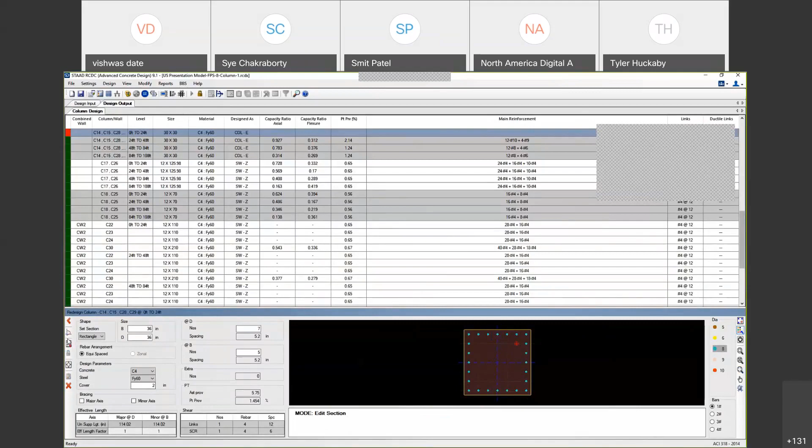So one more option over here for me is to try increasing the column size. Now of course it has an impact on analysis, but if I want to try this size and what is the percentage I get, I can do that. So I can put a new arrangement. It is giving me good arrangement, but only thing is there are 4 bars of smaller size, which is impractical to do. So let me change all those bars to 8 size. I make it 8 size and I check the design again. It passes, I accept. So now you see I have modified the column size that I had used from analysis.

Now in a way it invalidates my analysis, but yes, you can handle that. So there is a report called column size changed, in which you can notice the difference between the original column size and the new column size. If you feel that the difference is not big, you might want to accept these and go ahead with the design without changing the analysis. Or in case you want to go back to analysis, you use the command called update analysis file. It will recreate a STAAD input file updating the properties of these particular columns which have been updated.

So in this manner, I am completing all my column design. So now my columns are completely designed. Now I want to go to the next step of verification of calculations. So let me generate a typical calculation report for you.

So I'm generating a report for this group. So when I open the calculation, it's a detailed text calculation report. You have at the top a reference to an analysis file and the location where it is saved and a time stamp of that saving. So that means you can always refer to your calculations and find the analysis file that was relevant to that calculation. Then it will list all the terms that are used in the analysis presentation of report, the clauses that are used.

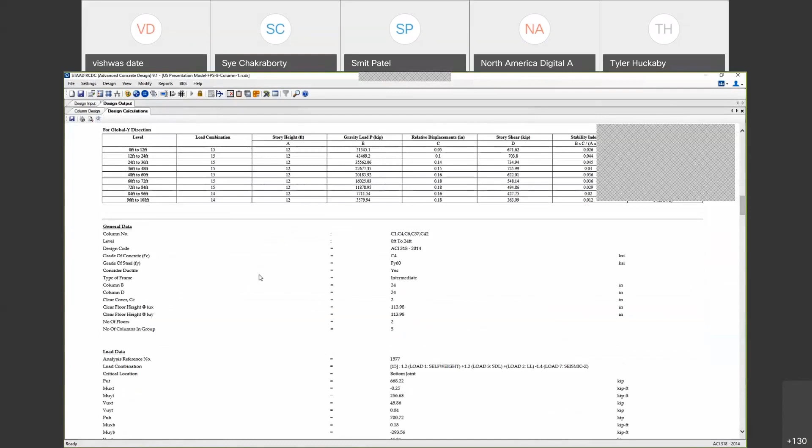Then it checks the stability index. For example, as I mentioned, if you have not done the P-delta analysis, then you might want to do a slenderness effect here. It will give the geometry of the specific column between the 2 levels, what is the height, what is the clear height, all of that information, critical combination that is there currently. Then it will do a check for slenderness. Then it will calculate the final design moments.

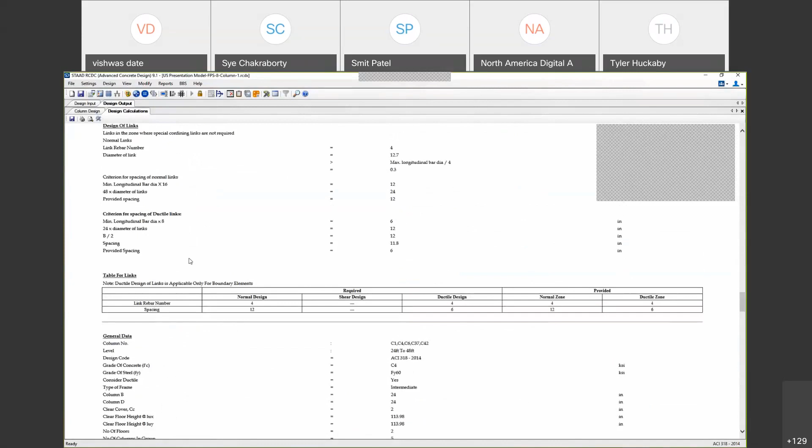Then it will check the P max, the maximum actual load check. Then it will perform the design internally. It will give you check for your Bresler's equation with principal directions. Perform the shear design in both directions independently. Calculate the links. Provide special confining links calculation all in detail, including all the spacing criteria, everything. This report is like a textbook report.

There is another report which is a quick short report which can be used internally in the organizations, which will give a summary of column design. It is not a very detailed report. It is very concise, and maybe it is just an internal checking by a senior for the junior's work.

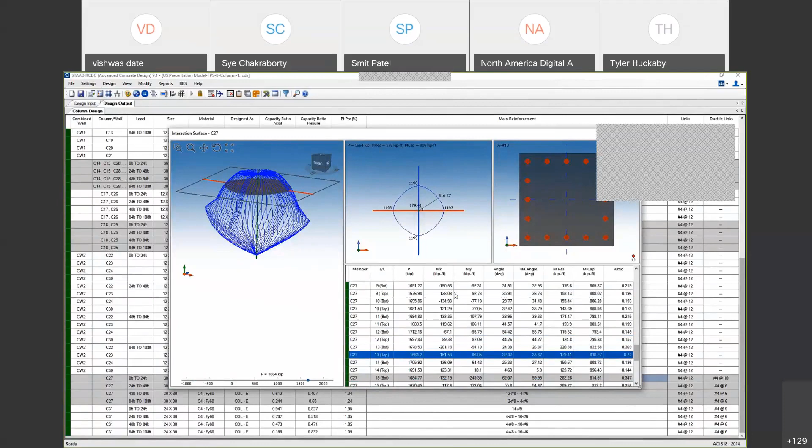One more interesting thing that we provide, which I showed you earlier, is a 3D PM interaction curve. So let's say for a given column section, I want to check what is the 3D PM interaction. So I can go to that specific column. I can vertically go across the P's and check my section, or I can pass through all load combinations and see what is my interaction ratio and how it is changing across the line. So this horizontal section is for a given P. What you can see is the capacities across both directions. So these are the various design calculation reports.

Another important thing is quantities, which is often a requirement from consultant's point of view. So here it will list concrete quantities based on the various grades that are there, the rebar quantities based on given diameter, and give you some basic consumption ratios, which will tell you whether your design is optimized or you want to do some further optimization. So all of this is calculations, design, engineering part. What about the outputs? So let me show you a detailed drawing for a column.

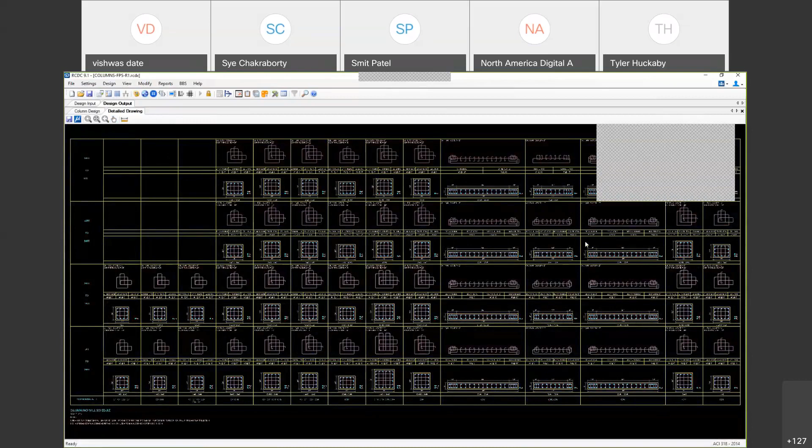Going further is the actual drawings now. So let me draw a detailed drawing for all columns. So this is the concise drawing for all columns with all the groups. So let me zoom into a local column, for example. So there are levels which are grouped. Some columns stop at 4th floor level, so the upper box is empty. Some columns go through and through. There is a single individual wall and all of those details.

Going to a local column, what you can see first is the levels, between which levels this section is valid, the size of the section. Zoom in a little, you will find the rebars are presented with specific legends for each diameter. The column numbers which are grouped are properly mentioned. There is a mention of grade of concrete, grade of reinforcement, cover that is being used. If there is a confining zone for special seismic detailing, that is provided, and the links in those various zones. So this, in short, becomes a complete documentation for the site to be executed. And as I mentioned, it is very automated, so there are no issues.

Further, we also have reports like column elevations. Very often you need to show some typical elevations. So what you can see, there are 2 different types of sections being used. Section 2 is at top, where my seismic moments are governing, so I have slightly more reinforcement compared to a lower section, which is handled in the lapping at 36 feet level. And all the sections below are typical section 1s.

In this, you will find the lengths of each confining zone, the middle zones, the types of links, the cross sections being shown, the section marks, levels, everything. So this is a very detailed sample for one column, but this can be done for all columns individually. It will also show beams and everything in the column elevation.

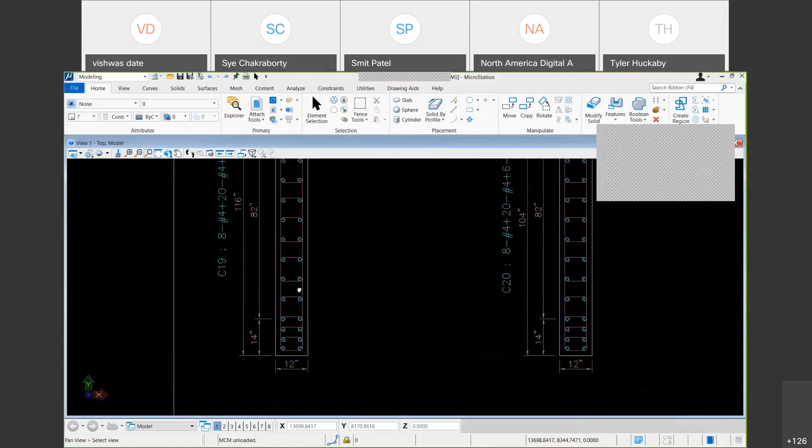This is a detailed report for a combined wall. So you will see the end boundary zone length, the reinforcement details within the boundary zone, non-boundary zone. The junction is detailed with the maximum effect from both the directions. The reinforcement is mentioned from the left to right. So starting with the junction that is common to both the walls, in one of the walls it is covered. In the middle wall there is only one junction, so it is not covered on both sides. And also for each individual wall, we'll show the link arrangement.

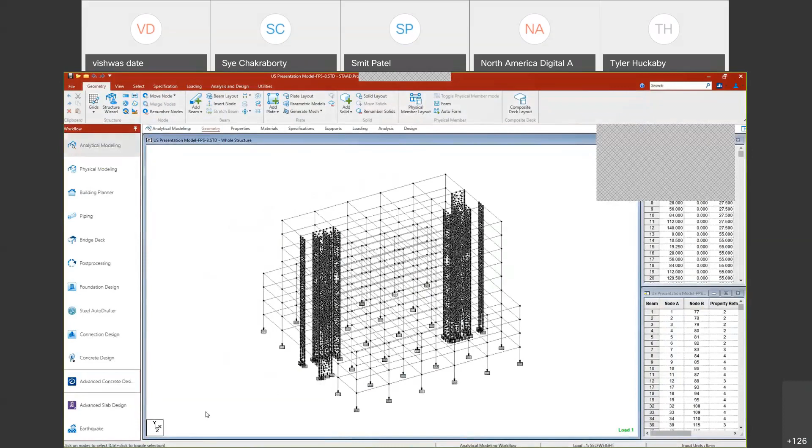So this in short is my column module. So let's go further to the beam module. Something similar to this, I'll run through a beam module process. Similar to column, you start the beam module. So again, you launch advanced concrete design. Come here, you list the project, type of project and everything. In this, more importantly, you can design typical levels together. So you select the code, the file is already selected. It will give you a list when you select the beam. So it will give you multiple floors that are with the beams.

Now, very often you have typical floors in the building. So say second, third, fourth levels are identical in design. So you may want to give the same design to both because it is difficult on site to differentiate every level. So when you combine, you will give the effect of two levels. Similar to columns, you have two parts of the graphical scene. On the right hand side, you see the graphical window with grids, column numbers exactly as what we saw in columns. In addition to that, now we have beam numbers. And you can see the beam numbers are like what we will provide in the drawings when we execute the details for the site.

STAAD has members. Again, we convert those analysis members to physical members, which are beams. Moreover, we identify groups of the beams. Each beam is not designed individually. A beam is a part of a group. So for example, if I'm designing B2, right side of B1 is common to left side of B2 and the left side of B3 is common to right side of B2. So identifying beam groups is automated. Beam groups in both directions, even inclined beams can be handled. So for example, here, wherever I'm clicking, that beam is getting highlighted in the dark cyan color and the rest of the group is highlighted in the red color.

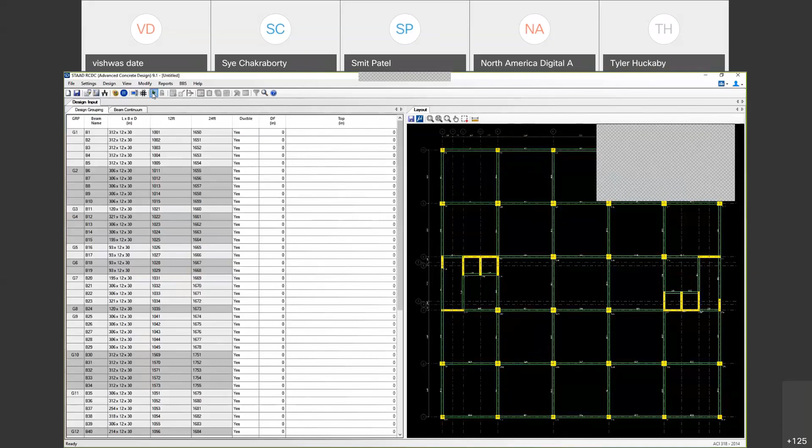As I mentioned, similar to columns, we have basic settings. We could actually import the load cases and combinations from one file to another. So if you have set them for one project, you can import them in another project. You start the design process. After auto design, you will see this window.

So in this window, what you will see is group number, beam number, type of beam, whether it is seismic detailed or not, size of the beam, grade of material. And what you can see is that the bottom and top of the beam is divided in three zones: left zone, mid zone, and right zone. Similarly, for top, you have left zone, mid zone, and right zone. And similarly, for shear, you have left, mid, and right zone.

So basically, if you visualize the beam in elevation, it can be visualized in three different parts. So that's the philosophy. So how do we arrive at this detailing? Now let me show that. So you go to a view called detail view. In this view, what you can see is the graphical representation of the beam in elevation. So you have the entire group seen together from B1 to B5. Each of these beams is divided in 13 locations.

At top, for example, the red line indicates the rebar required at various stations, and wherever your cursor goes, the value is picked. The blue line represents my provided reinforcement, so it has to be above my required. As I mentioned, you have 3 zones, and these 3 zones are very clear by the dark vertical lines at the bottom, where I'm providing the reinforcement required. Similarly, for bottom, I have a red curve which shows my area of rebar required.

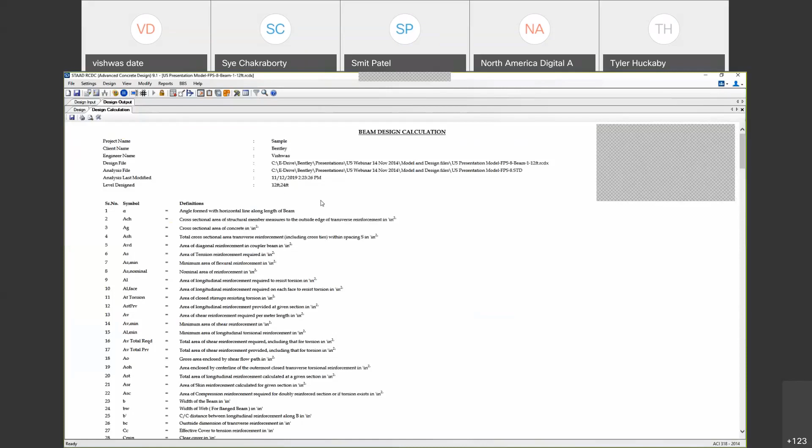Then we have a lot of clauses from the code which are important clauses. We have not listed all of them because sometimes that is too much, but individual important clauses have been considered. Then we have the geometry of the beam. So in this case, as I mentioned, you have 2 beams, one at 12 feet level and one at 24 feet level. And then the clear span, effective depth, all of that.

Then the minimum AST required, all of that calculation. So all of those standard details are considered in the first part. Going down, as we mentioned, we'll also list the type of the beam, ductile, seismic detailing, special, intermediate, whatever is there. Then in the left zone, at the bottom, you can see left and mid zone, the governing section is 12 combination. And at the top at the same time, you have different combinations. So you can see that the governing combination for a given zone can be different depending on the bending moment diagram or the envelope that gets created.

As I mentioned, the reinforcement required is calculated in different parts. One is for the flexure, pure bending moment action. Other is for torsion. In this case, the torsion exceeds the critical torsion. So it will calculate the longitudinal reinforcement required for torsion, distribute that across the 4 faces of the beam, and then that gets added to the flexural reinforcement, and then it is provided. Now in this case, my minimum AST that is provided is sufficient for everything. So that's how we have arrived at final minimum AST.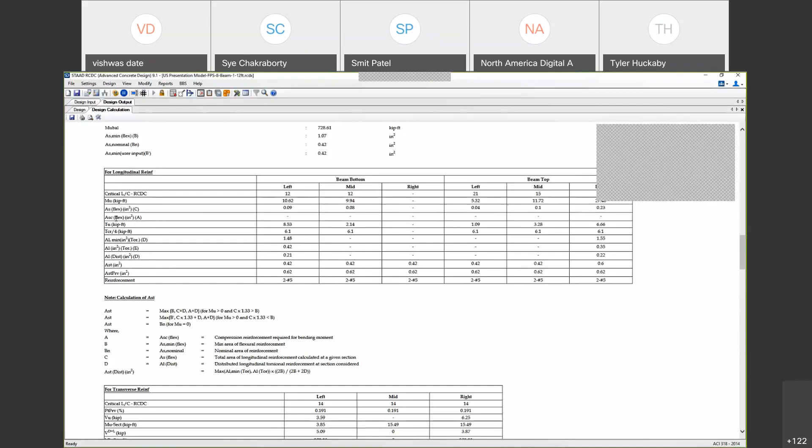Coming to shear design, it will first do the basic shear design for the forces from analysis. Then it will do the hogging and sagging moment calculations for the seismic detailing. So when I change the reinforcement at the top and bottom section of the beam, it will affect my hogging capacity or sagging capacity, and will affect my sway shear calculations. So accordingly, all those things are considered together. Similar to flexural reinforcement, the final stirrups that come out of design are also due to normal vertical shear design, torsional requirement, and special confining requirement. All three put together will give you my shear reinforcement.

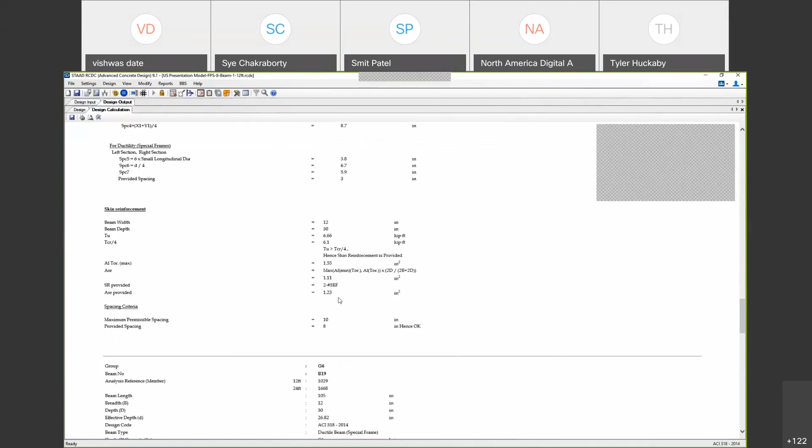The spacing criteria for stirrups are listed specifically. Some are normal basic criteria, some are based on torsion, and some are based on special seismic detailing as per the various clauses of the code. Coming to skin reinforcement, or the reinforcement across the face of the beam. Based on the torsional capacity requirement, the distributed reinforcement is calculated and it has its own spacing clauses. So we consider all of that in beam design. These are my calculation reports.

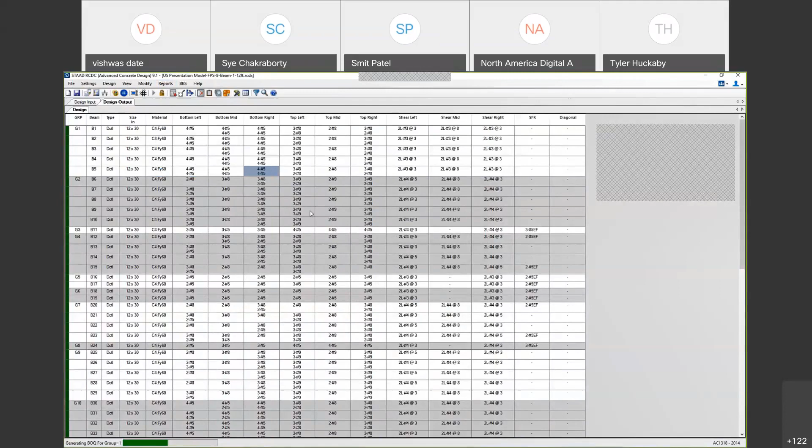Going to detailed bill of quantities. I'll generate 3 types of bill of quantities here. One is the summary, which we saw in column also. In the summary, we have total volume of reinforcement, total weight of reinforcement and total volume of concrete along with the ratios. Then the next type of BOQ is based on the type of the reinforcement.

Also, as I mentioned, if you put rates, you will get the cost also. In this type, you have main links and the face reinforcement. You will see which amount is governing, and then you will get to know whether your design is in line with your understanding. And the last is, for each beam, for each diameter, what is the quantity.

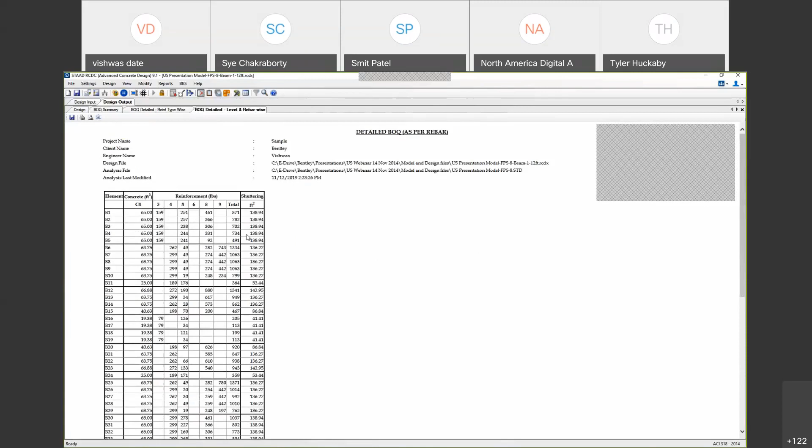Now these quantities are about 90 to 95% accurate. So for basic procurement scheduling or for basic planning purposes, this can be very well shared with the clients. These are the 2 main modules, columns and beams. Let me just showcase a few projects for which these have been used.

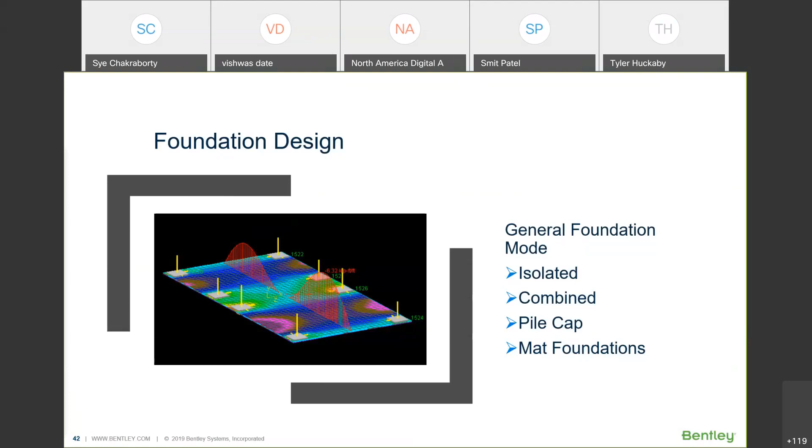So there's a lot it can handle, but for today's workshop, we're going to just look at some of the general foundation options and see how we can do a foundation design based on the STAAD.Pro model that we have been looking at. So let me bring up the STAAD.Pro model out here.

So once my analysis is done, I'm just going to go to the foundation design, accessed from the left-hand side from here. And then you can select the supports at which you need to design the foundation. You could select all supports, or you can select a few from your list of available supports. So we are going to select all supports here.

And then you also get to select which load cases and combinations you want to include as part of your foundation design. So I'm going to leave out these basic cases from the start, include all of those serviceability and strength cases for my foundation design, and then launch STAAD Foundation Advanced from this button. And we encourage that you always launch STAAD Foundation Advanced from within STAAD.Pro, because that's how the integration happens with your STAAD.Pro model.

And that way, if your analysis model changes later on, you can always just get your updated support reactions into STAAD Foundation Advanced without any extra effort. And that ensures that your foundations are always in line with your structural model. So that opened up the STAAD Foundation Advanced software. And you can see all of these foundations which are imported from my structural model.

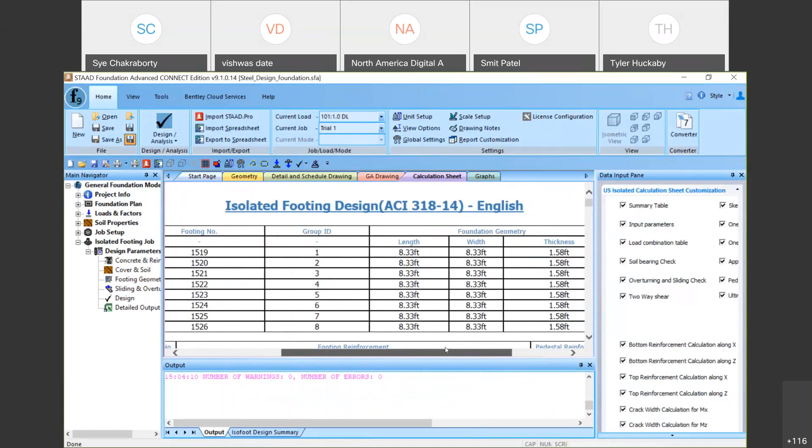Once the design is completed, it will give you a detailed calculation sheet, and that is one thing that I really like about this software. The calculations are so detailed that if ever you want to do any hand checks, it is extremely easy. So let me actually increase the size of this window so that you can see it a bit better. So at the beginning of the calculation sheet, it gives you the footing number and the size of the footing, the length, width, and the thickness.

Then it gives you the reinforcement details for each of the footings, and then it goes on to list the detailed calculation for each of the footings. So it starts with a sketch, and then goes on to give you all the details of your inputs for the design, and then the soil properties. So these are basically the inputs which are specified first, and then it gives you the load combinations, the various service combinations, the strength level combinations, and then what are the applied loads that are critical for the design for each of these service and

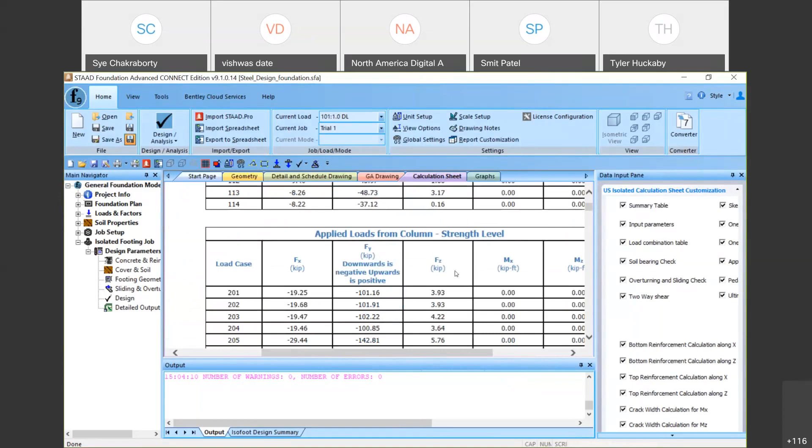the strength load combinations. And then it goes on to give you the gross pressure at the four corners. So we input the gross allowable bearing capacity as 4 kips per square feet. So we just try to get as close as possible to the 4 kips per square feet. And in case there is an uplift, it also can do adjustment of pressures using a very sophisticated algorithm and give you the readjusted pressures at the different locations.

And then it does the stability check. So in this table, it would report the actual factor of safety that you have against sliding and overturning for each one of the service load cases that you have defined. And then it provides the reporting for the critical load case when it comes to overturning and sliding. And after all of these, it goes into the strength checks. It does the punching shear check.

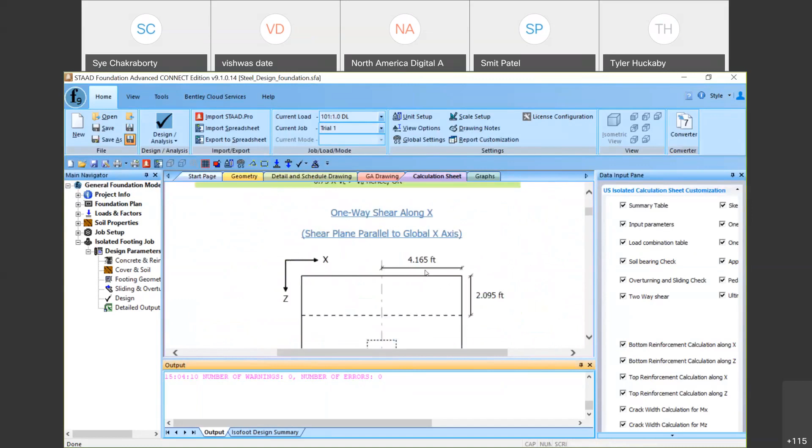As you can see, it actually draws the punching shear perimeter around your column, and then gives you the details of the calculations, and all the equation numbers in the code are mentioned along with the actual equations. It does the one-way shear check. Again, it gives you the location of the critical section for the one-way shear check, and then one-way shear check in the other direction, and then the flexure checks. So it's pretty detailed, and you can also control the level of detail by just checking or unchecking these check boxes on the right side. So that is also something that you can control.

Now, if you are doing some other types of design, so let's say if you do a pile cap design, then also it's very similar. So you again basically put in some of the input parameters in here. The only thing that's different out here is you are going to specify a capacity for your piles. So as far as your lateral capacity, vertical capacity, uplift capacity, you're going to specify those values up here, and you are going to indicate the pile diameter and what's the center-to-center distance between the piles and what's the edge

distance. And then you can actually put in your pile arrangement yourself in this table, or you can ask the software to find a suitable pile arrangement for you. So it will come up with a number of probable pile arrangements. So here is a 3-pile arrangement, here's a 4-pile one. If you want to go for 5 piles, that's also fine. So it will give you all of these options, and depending on which one you want to choose, you just select that and choose confirm selection.

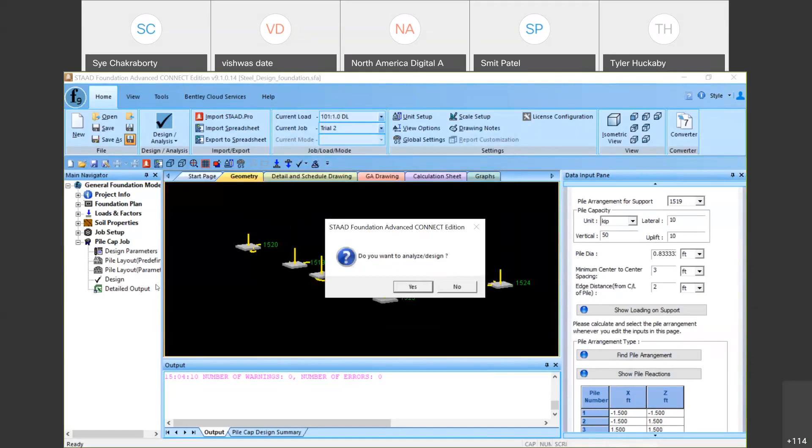And after that, if you click on show pile reactions, it will give you the reactions in each of the piles based on the arrangement that you have chosen and based on all of these load cases. So once you do that, then the process is very similar. You just run the design, and it's just going to go through all of these load combinations and give you a detailed calculation sheet, very similar to what we have seen for the isolated footing.

As you can see here is the one-way shear check. Then again, the one-way shear check for the other direction, the punching shear check for the corner piles. So it goes into pretty detail, gives you the flexural reinforcement calculations and stuff.

Let me quickly go to the third type of foundation that I have defined out here, which is a mat foundation. The only difference between the mat foundation and the isolated or the pile cap is the software follows the rigid method of analysis and design for the other cases. But in this case, for the mat, it does an actual finite element analysis.

So what you do is you come here, and after your supports are imported, you just define the boundary of the mat, and then you generate the mesh, and you just need to specify some basic property, like say what's the slab thickness, and then if the mat is supported on soil, you just specify the subgrade modulus of the soil up here, and just check this box, use soil spring. So pretty much this is handled exactly the way STAAD.Pro handles it.

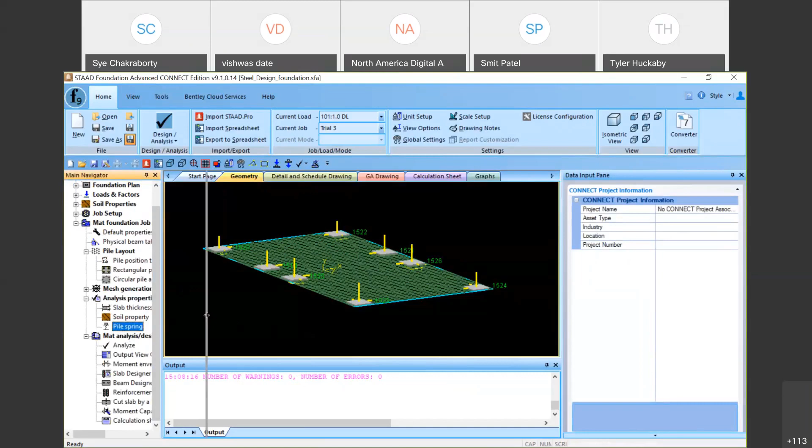If you have piles, you can just specify the XYZ coordinates of your piles, and then you can come here and specify the pile spring stiffness. So that also is possible. So mat supported on ground, mat supported on piles, both are possible. And once you are done with all of these inputs, you just go and run the analysis. And at that point of time, it basically brings up the STAAD.Pro analysis engine.

So basically, there's a STAAD.Pro model that gets generated in the background when you run the mat foundation analysis, and you have access to this model in the same model folder. So it would create a folder by the name that you have given for your job, and you can actually access the .std file also. But don't modify the .std file from there. If you need to take a look at it, just copy it to a different location, because otherwise it would break the integration between STAAD Foundation Advanced and the STAAD.Pro model.

Yeah, so same detail of all of the calculations, and you can see it plots the deflected shape for this particular load case.

You can also do a lot of good things, like if I go here, I can choose the soil pressure option, and it's going to show me what the soil pressure is for this particular load case. And if I select a different load case, then it will adjust the soil pressure according to whatever the current

selected load case is. And then once you're done, you go to the slab design portion, and you just input certain basic properties, like what's the grade of steel, concrete, what is the top cover, bottom cover, pedestal cover, what's the minimum bar sizes, what is the minimum and maximum spacing that you're going to allow for the foundation design. You can check this box if you want to include the Wood-Armer moments in the design.

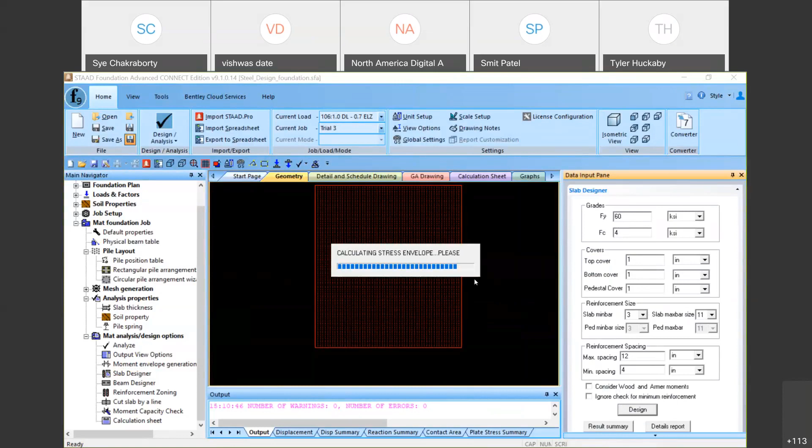And once you are done, you just click on the design button, and the software is going to give you a table with the longitudinal reinforcement as well as the transverse reinforcement, both on the top and the bottom faces. So these are your critical moments for all of these directions and faces, and it also gives you the coordinate location where this moment occurs, which is the critical load case, and what's the reinforcement requirement in order to satisfy this moment. So these are provided in a table for you.

After that, you just tell the software what kind of reinforcement you want to go with. So you would go to reinforcement zoning. Zoning essentially is declaring how many different variations of reinforcement you would like to have. So if I want just one variation of reinforcement, a certain diameter at a certain spacing, I would just choose one. And if I click on create zone, it would show me, like in this diagram, that number 7 bars at 10 inch center to center should be good for this particular direction and face. So similarly, you would generate the reinforcement zoning for each one of those faces.

And another thing that I want to show you today is these moment capacity checks. Even before you get into the detailed design, you can actually do some little testing at your end just to see what kind of bar diameter and bar spacing is going to work for you. For example, this is a little utility where you provide some very basic inputs like the grade of steel, grade of concrete, what are the covers, and you specify a bar size and a fixed bar spacing. And if you plot the capacity diagram, it will tell you what moment capacity this particular bar size and spacing is going to give you. So you now know what the capacity of the mat is at a typical cross section.

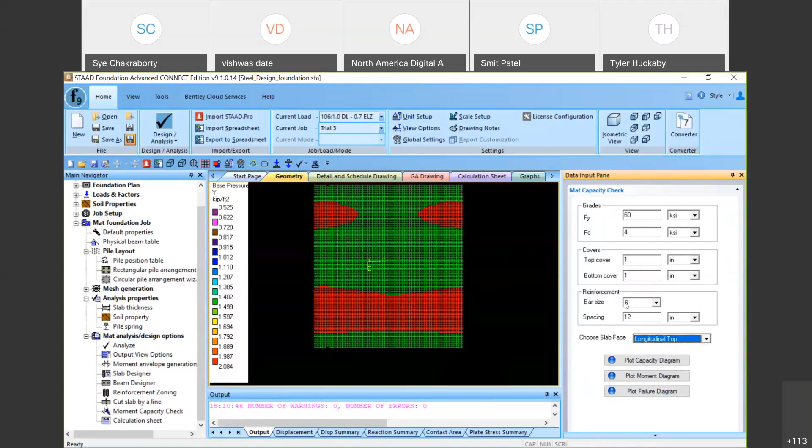And also just a quick reminder: always remember to launch your STAAD Foundation from within STAAD.Pro, because that is how you ensure that it's integrated, and any changes to your STAAD.Pro model would then be directly read into STAAD Foundation Advanced. There is an import option up here in STAAD Foundation Advanced that allows you to import a STAAD.Pro model into a new STAAD Foundation Advanced file. But if you do that, there is no integration with the STAAD.Pro model. So that's the reason we suggest not using the import STAAD.Pro option, but launching STAAD Foundation Advanced from within STAAD.Pro.